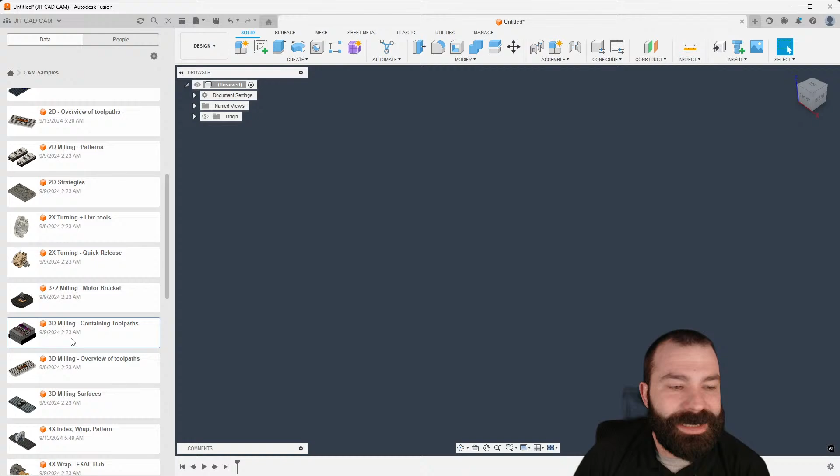So I think a lot of people, I don't know if the theme has just been 3D toolpaths lately, but I've gotten a lot of questions about things like boundaries, when to do what, all inside of Fusion. So for this, right off the start, I'm going to show you guys, there is an amazing example here called 3D milling containing toolpaths inside the default library. Now, it's great to go through and review the different types that we have, right? So keep in mind, this is a little bit of an older file, and I'm going to have to save this. So I'm going to go ahead and throw this in a little better place. Where are we at? And we are in April now. Man, this year is flying by. How do you guys feel?

So as you can see, this has a lot of different examples inside the software. However, I like this model because it does show a lot of people the power of Fusion and what it will and will not recognize when it comes to toolpaths, right? So as you can see in our very first setup, they've actually auto-created a few toolpaths for you. Now, I always tell people the process at which you want to use Fusion is actually pretty easy. Start with the basics, and of course, only add to stuff at the top moving down. You never want to jump down to the bottom and start selecting stuff, right? And then move right as you can.

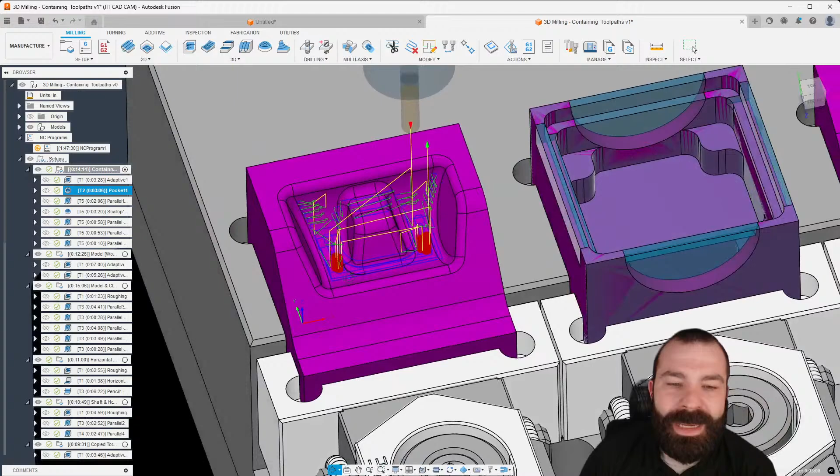So a good example of some containment boundary stuff is this is all being driven off a chain selection, which just so happens to be the edge up and around this profile. So again, at the simple level, we always like to say, get the blue lines where you want them, right? As you can see, that was a good example on how to get stuff down inside of that part to be able to rough it out. Now, I did get some other questions that were pretty interesting, and this is probably going to paint a lot of you a little better picture here. But in the event we now have the blue lines more or less where we want them, if we scroll down, and this is where I really like the idea of adding things after the fact, right?

One thing I think a lot of people don't realize is we can add machine surfaces, and we could either avoid them or stay away from them. We'll see this a little better on a 3D toolpath versus a 2D toolpath. Let's see what we got. We got a lovely scallop toolpath in here, so let's duplicate it to do this three different ways.

We have our original, and now I'm modifying a second version. We're going to say we want to avoid just these handful of surfaces, as you can see I'm going through and selecting those surfaces, and we're going to see what kind of toolpath we can get. Just like that, by doing an avoid surface, it's automatically removing where that toolpath is going to go.

One big thing about that at the end of the day is the fact that we have now scaled that toolpath down to not touch the surface. But something like contact point boundary is still working with the fact that the edge of the tool needs to get all the way down this fillet.

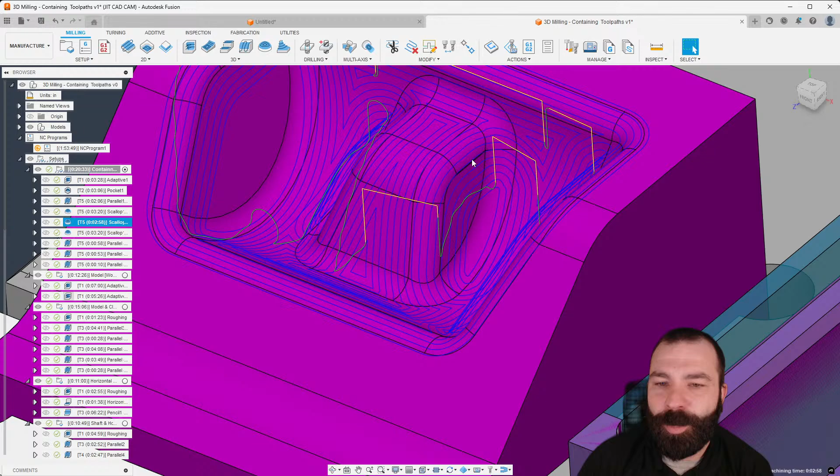Now another way to look at this, and this is the way I like to think, is if I go in and add machine surfaces, and let's say I want to stay away from these two walls a certain distance, I'm going to plug in 20 radial. What you're going to see when it comes to machining those areas, we will actually keep the tool further away from that wall. A good comparison of this is I highlight both these toolpaths.

It may be tricky for some of you to see, but the avoid surface touching, or only machine certain surfaces - I personally don't believe by default you should just go in and pick a bunch of surfaces and say machine specifically this. We like to narrow down the boundary first and foremost, and then from narrowing down that boundary, you can go in and in very specific areas say only do this, only do that.

Another thing I think a few people miss here is if you're somebody that's actually going to do stock to leave. So I'm going to go over to stock to leave here real quick, and let's just throw on 10. Then we're going to go back and look at the geometry.

Now if you look at model here down on the bottom right - is my head in the way? Let me get out of the way. Model on the bottom right is showing you there's already radial stock to leave 10. Remember, we've added that in, and from that we've added either an additional group to stay away from.

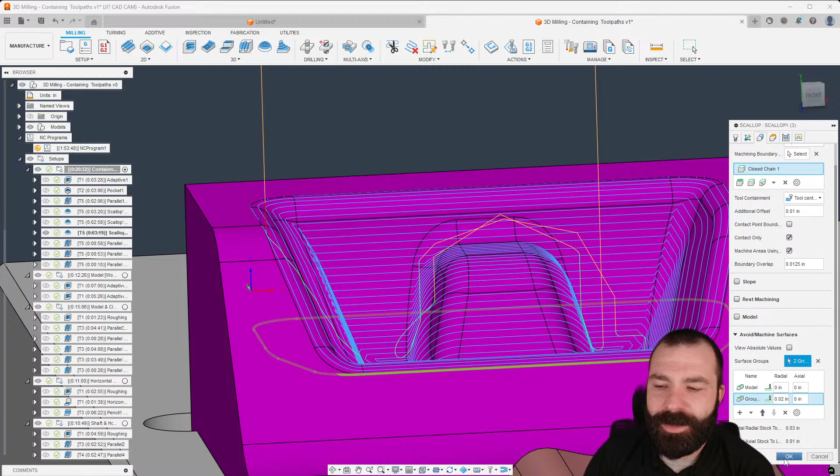So this is really valuable if you wanted - you don't need stock to leave anymore. We could actually use model, or we could use group as well, to be able to achieve additional stock to leave in a lot of different areas.

So again, if we turn those two toolpaths on, what you'll still see is we have 10 difference between these two toolpaths. But over here on that wall, we're actually achieving almost 30 - that's the 10 plus the additional 20 that we specified. So as you guys can see, when you get into that containment, it really is much better to start at the top and work your way down.

So if you're somebody that's doing mold making, again, perfect example here. Let's say I'm actually going to turn stock to leave off here, and what we're going to do is say our surface group is going to be based off a different set of surfaces. I would like to stay away from my internal fillets by an extra amount, so I'm going to utilize surface selection, and we're going to stay away from them by 20 in both directions.

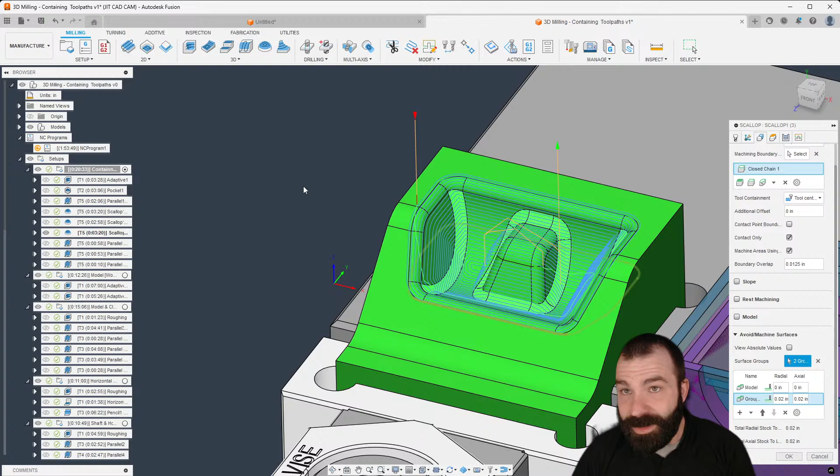Or if you have a larger radius tool that's getting down in those corners, again, causing those surface defects. Adding the surfaces is very valuable after the fact of getting the toolpath to where we want it on this part.

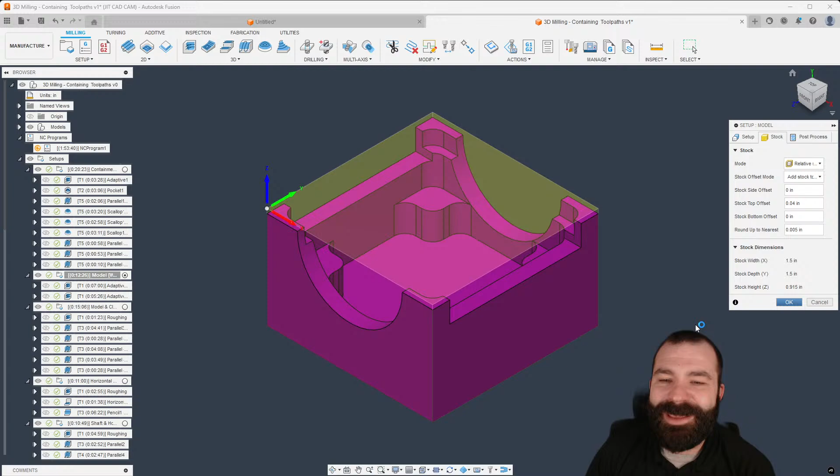So again, another really good and powerful one that a lot of people miss out on is when we talk about having stock already in place on this part. But if it was a casting, here's where your initial roughing is looking at the entire part profile, and then going back a second time we may use a different toolpath. But if we're using a casting, we have two models, one model could be the stock itself.

So if I go in and say, from solid stock, I'm going to not select everything, of course. What I'm looking for is actually just the model. If you guys give me a second here, this is probably the best part, is where I got to dig down and try to figure out where that stock model is. I did not draw this part. So as you can see, we now have our stock as basically a different profile, a different working model.

And if I regenerate my toolpaths with rest machining, you're going to notice it only machines the difference between those two models, my stock model and my part model. So Travis, let me know if you've ever thought about that with the models and how well that can help you.

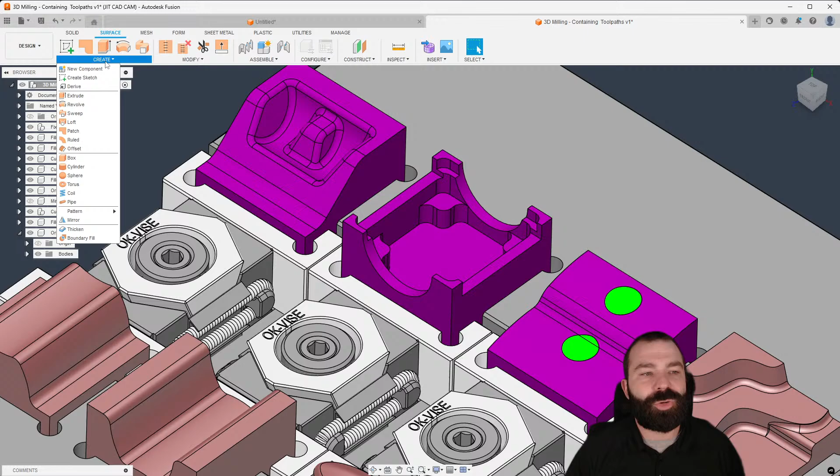I do know a traditional way, like Travis is talking, that if you wanted to stay away from something possibly, you could always go back to a surface and create an offset surface. And then you could offset that surface to be able to use and drive for a machining surface. So as you can see, we've now created a skin.

So if I go back to manufacture, if I tell the software this is an additional model for machining, I'm just going to use that skin. And then what we're going to see, you should see no toolpaths going anywhere near that surface. So again, now it's thinking based on the Z height and the X and Y that it can't get close to that surface placed there inside the part.

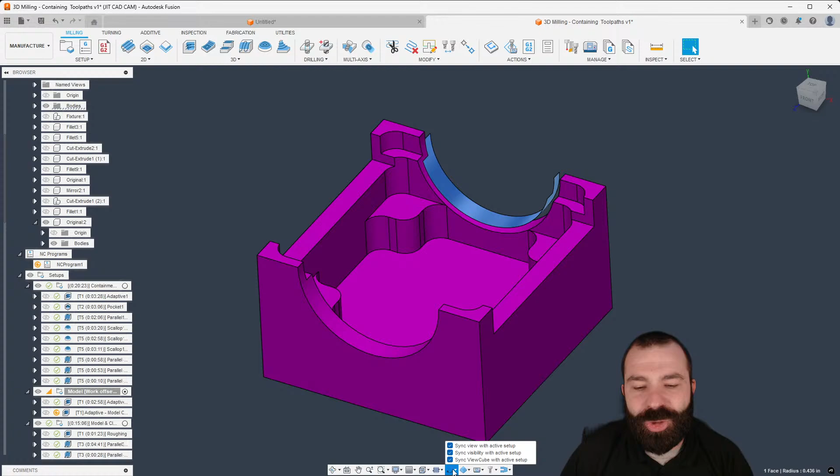So again, as you guys can see, working through more and more. Now, something I noticed a lot of you haven't done yet, and I highly recommend, is turning on your synchronizations down here. The reason why I like my synchronizations personally turned on is when I'm jumping from setup to setup. What you guys will notice is it's toggling on and off all of my bodies that are associated with that. Now, this gets better of course when you start to think about jigs and fixtures, especially in a multi-axis environment.

So here's my fixture now, I'm going to add that in with everything else. And now you can see the fixture even will turn on and turn off when jumping from part or setup to setup. So again, if you're going to run something in a pallet, it's very important to define those things, but it's also extremely important when we start to look at some of these other parts.

So again, down here, here's another good example of using model in addition to. So by default, we're roughing out this part. Now some of you are probably noticing we're not going down inside these holes. And the reason why we're not going down inside those holes at all is because in the geometry tab, somebody has added in the patches for manufacturing.

And again, those patches are hanging out over here on the left. So there's one patch, there's two patch. Now, why they're selecting three bodies, I don't know, which we should probably question that.

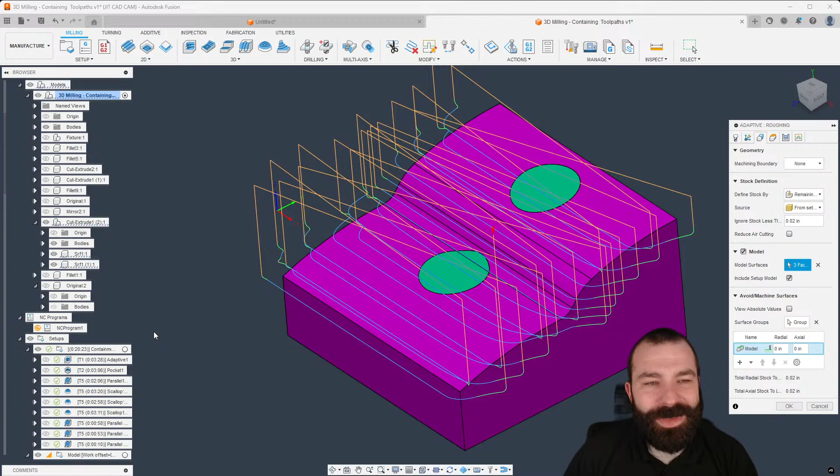As you can see, using patches to patch over your hole works really well. Now I've always been asked, do I patch something? Do I not patch something? What's the better workflow? I don't really think there is, right?

So when doing a 3D toolpath, you can notice we're dipping down inside those areas. Now they're doing a 3D toolpath specifically where the patch is, and that's based off the ability to select the model specifically without the original setup model. In my opinion, they're defining a certain area without needing the original setup model. This is not a very good way to work inside the software because that could have been its own setup.

Why are we machining a surface by itself? Doesn't quite make sense, but from an example standpoint, if I was to check include setup model right off the rip, as you guys can see, we're machining that whole surface, right? Now another way you could have done that is inside of the software.

Let's go ahead and shift gears here and grab a few more toolpaths. So as you can see here, we're machining everywhere but where the patches are. This is one of those things that depends on what you're doing and your end goal in the software. If we had model turned on and those two surfaces, but I wanted to contain this toolpath differently, selection would be your best friend.

Now how you could see that is, if I roll back up here, we're dipping into these holes, right? I go to a selection boundary, and I could say stay between those boundaries. So you guys are seeing I quickly select those couple of things. I hit OK, and now we're avoiding those holes again.

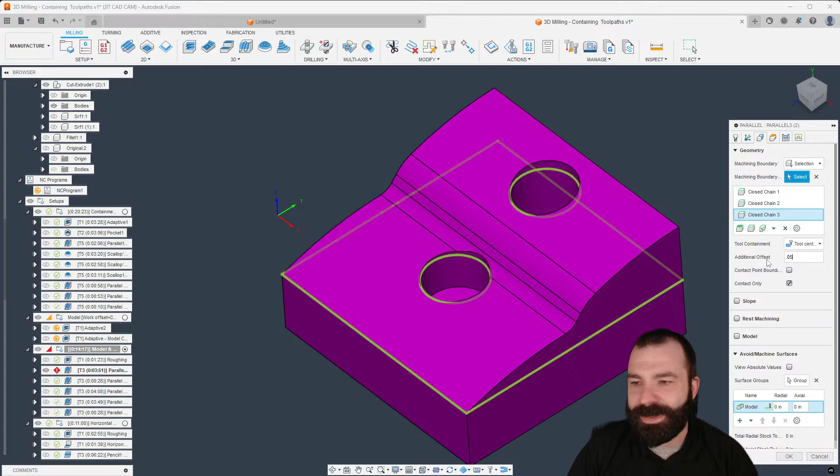Let's say I add an additional - I don't know the size of my tool, but let's say we go an additional .05 offset. For blending purposes, we may not want that edge to start rolling over, but we're dipping down inside of that area.

This is where I really believe the concept of starting from the top and adding to it as you go works really well. So as if I had surface patch models here, I can pull those surface patch models real quick, and now you'll see we are extending over that surface. With that extension, we're not actually dropping down inside the hole and causing any issues. A great way to change up your workflow and start to work with these boundaries.

Oh man, it's been a rough week. How about you guys out there? Flew to Connecticut a week ago, flew back to Pittsburgh earlier this week.

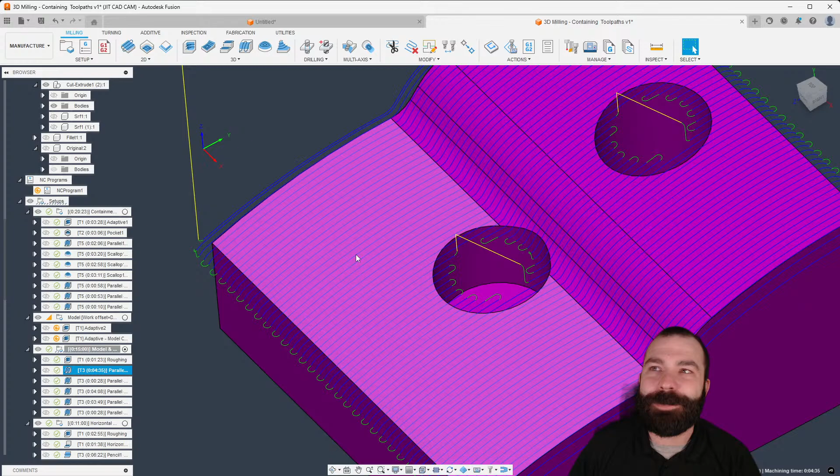Still trying to recover. So again, your boundaries, as you work down that list, become more and more valuable, right? Let's say, for example, I don't have model here at all.

Now I could go in, as you guys have seen, and say avoid these walls here. Now a lot of people don't realize we're still dipping inside of there, even with avoid set up. This is why I cannot stress the idea of adding in addition to, because when we're dipping in there, the tool has yet to make contact on that surface. So that contact point boundary is just being trimmed back to where it never touches the wall on that avoid.

So you guys can take it for what it's worth. We could do a lot more here. Moving a little further on, as some of you may guess, we want to extend those surfaces out. This is like Travis pointed out earlier, if I came back to my model, I'm going to throw this in the right area so we can pick it quickly.

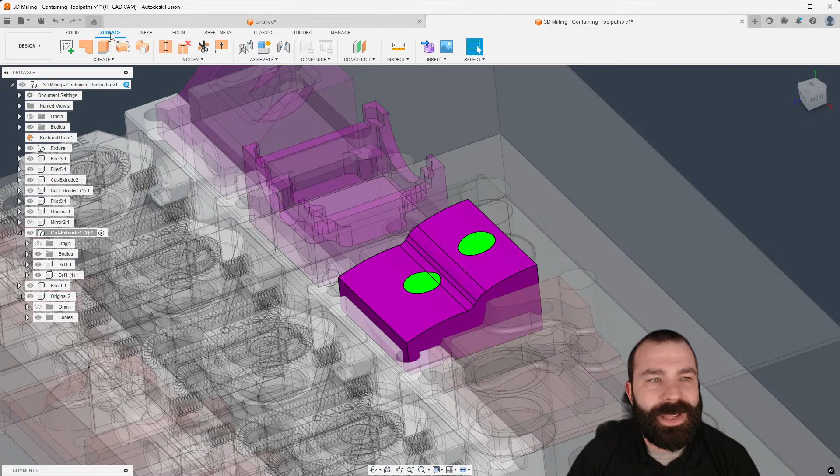I could go through and actually do a surface offset. Now I'm going to offset that entire top surface, leaving it at 0, and then I may do something like an extend. So I could go through and extend all edges of this and create a bigger plane to work on. With that plane to work on, that will be added as a machining boundary.

And it seems a little slow in chat this week. Are you guys running machines? Is that what's going on?

So again, as you guys are seeing, we're waterfalling past the edge of our part. We may not want that. We could add that model in addition to. And now I have that model to my advantage. Remember, I've already added boundaries up above. So maybe we say silhouette here. And as you can see, we're now going all the way to the edge of that surface. That surface is considered part of the model, and we're waterfalling past the edge of the part.

Running 2 machines. Travis, what you got, smart machines, right? Both of them?

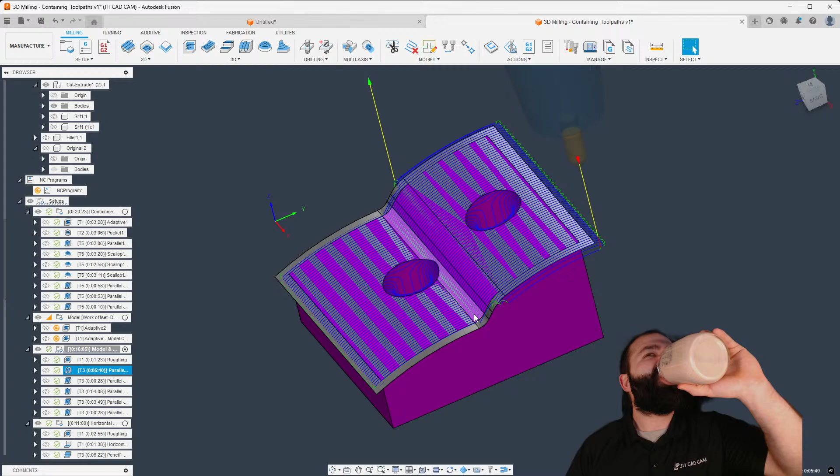So again, we could fix that based on selection. I'm gonna go ahead and say selection boundary. Now, here's one that I think a lot of people miss. The new boundary selection tool, in my opinion, the more I use it, the more I love it, right? So what I'm going to do is I'm actually going to use face contour this time, which allows me to pick multiple faces in one shot and auto project that boundary for manufacturing. So again, let's go ahead and drop off our extension here. We don't need that. And as you can see, now we're extending straight out using surfaces.

So as you guys can see, again, just going through these tool paths more and more, things like your selected boundaries, adding in additional models. As you notice, I never actually get down here to the bottom where I need to add surfaces. So it's kind of a last and final resort, right? So again, I could add these patches in, and now we're going to machine that entire area. We are waterfalling, and that is partially because of your selection process.

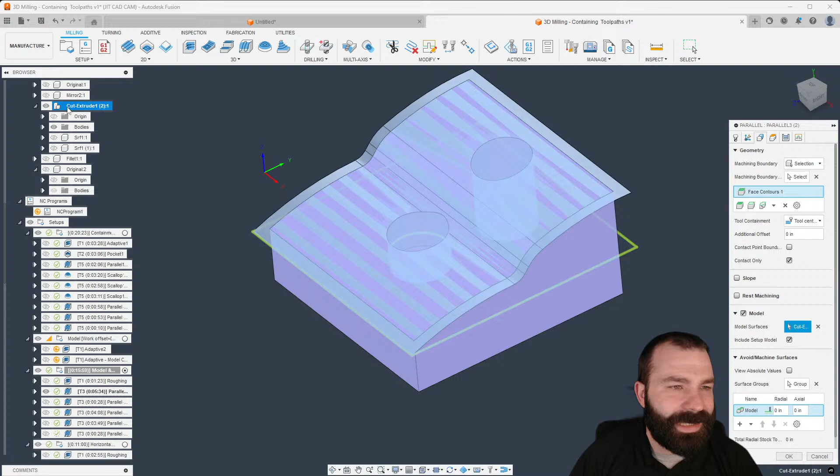Let's go back. We're going to add into that model. Where was it here? We did stick everything all into one extrude cut. So back again, because I'm getting click happy apparently. And we need that surface that we created and our 2 patches. Now, this leads me up to a really, really good point where, as some of you guys may or may not know, the ability to use things that involve components over bodies. And I'll show you an example.

Username, it always cracks me up. I'm going to call you user May out there, right? Us Ren May: cutting some plastic parts and they are nested. Is there a way to rough with horizontal and contour path? Do you want to rough with horizontal? Is there a chance you could send me a screenshot real quick and I could take a look?

So, good example here again is we're looking at this part. Something that has happened here is, one, that surface is lingering out there underneath the top level component. This is a big no-no, as a lot of you that have ever been trained by me know. But as you can see, this surface and this body lay underneath the top level component. And then you have 2 additional components all in one file.

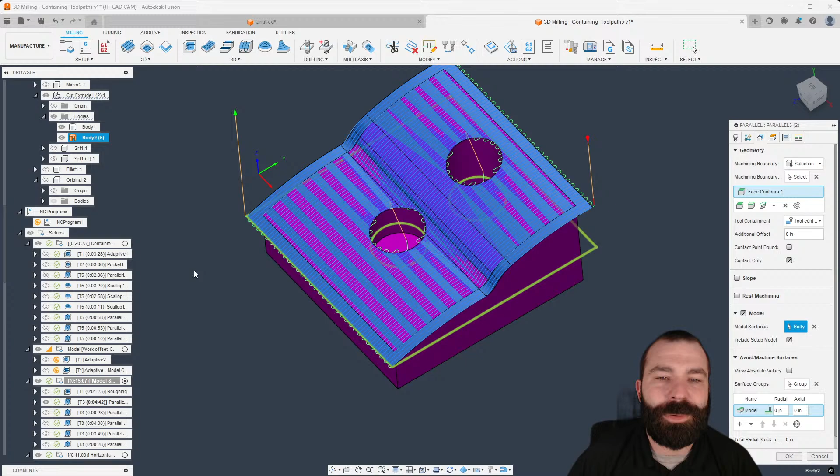So any size example would be great. So looks like we are looking for a simple thread mill calculation. M18 by 1 thread. So it looks like entering the crest. Okay.

Can I program a KUKA robot in Fusion? So in some robots, Gabriel, you actually can at the end of the day. Most robots use what's called a tool point. For a lot of you, that's called 68.2. Now, you're not going to have the freedom necessarily to control the joints of the robot from Fusion. And there are a couple of really good plugins that allow you to put Fusion code in there and then utilize that to manipulate it.

So it's been a while since I've had to look at that. I do have a lot of customers, Gabriel, that prefer PowerMill Robot. It's a much better solution for your use case. And you're more than welcome to shoot me an email at the info email address down below, and we can dive into that more.

All right. So Elijah's question is about the crest. And I remember this from last week and getting it to fit perfect. So when you're dealing with something that involves, in my opinion, and everybody does it different, his thread profile. Let's just say, for example, we're dealing with a 60-degree thread. I'm going to go ahead and set that to 60. And then what is happening in the world of Fusion, because we cannot, from a tool library standpoint, create a thread mill. I'm going to show this to you here. Give me a sec. So we have our thread mill tool.

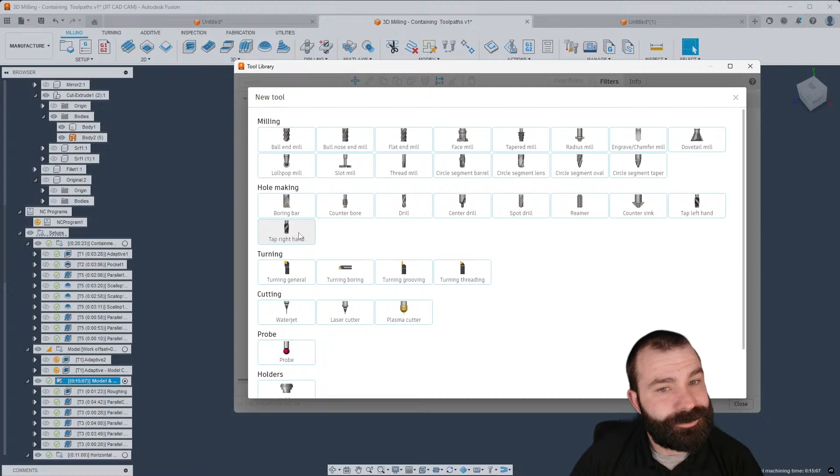Thread mill, thread mill, thread mill. Apps. Did I not see it? There we go. So the cutter inside of Fusion, the biggest problem is that at the very tip of the tool, it's always going to be a square profile, right? So as you can see, no matter what I define here, there is no profile, as in, is the tip of the profile round, right?

So something I like to do, and this might just be me, you guys can tell me, of course, is I like to draw what I'm going for, right? So if I know the tip radius in this case is, let's say, 10 thou. We got a tiny little circle way down in here, but I can actually do that math automatically now. So as I've set this up, I can be prepared to calculate whatever it is that I need.

Now, what I'm going to do is I'm going to add a horizontal line in here for reference, and then we're going to go ahead and coincidence this. But from whatever the diameter of my tool is, I can now do the math, get the dimension that I need, right? So again, what I'm really looking for is the distance from here to point times 2 to compensate depending on your threading system.

Travis, you hate the way you got to do NPT threads, huh? Is it the same scenario as you guys are seeing here? Again, what I like to do, this might just be me. There are a lot of good calculations out there. But as you can see, I can now control everything if I back way out and get this shrunk down.

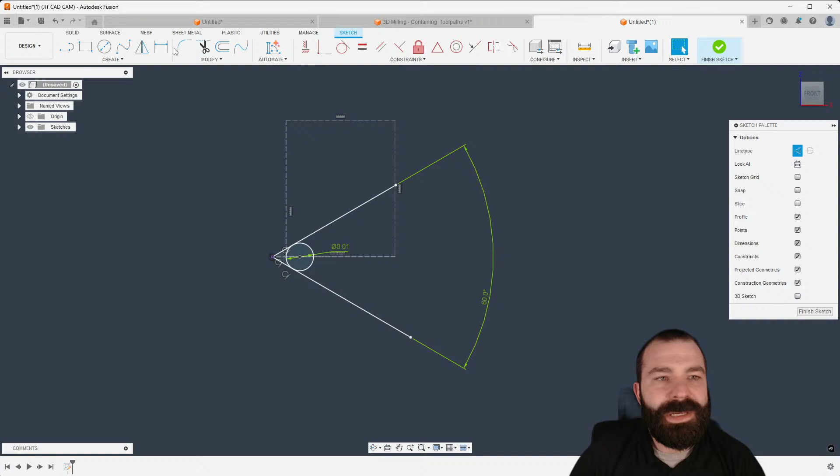Now that we have that, I can do the calculation to determine from the diameter of the tool or the radius of the tool. Again, if you guys didn't know, you can change stuff to center line instead. So if I went ahead and said diameter is whatever, let's say it's 125. And then from there, what is the distance from here to here? That would give me that additional offset, right?

Awesome to see Tim out there. Tim, you made it. Great to see you.

So again, you have your tool diameter, right? And then in this case, we're going to have an additional 5 thou times 2 diameter-wise offset, right? So depending on how you plan to do everything inside of Fusion, if we open that profile up by blank amount, that will fix our thread milling situation, right? So again, we do have a lovely little part here that's going to work for this.

So if I do my 2D thread, again, picking my inside profile, as you guys may or may not know, you have your thread pitch, of course, and then you have your pitch diameter offset. And this is where we would have to plug that in, right? Major diameter, minor diameter, and then add an additional 10 thou or whatever that dimension was that you calculated there. So this would get you very, very close.

To start with, I do recommend to most people, no matter what you do in thread milling, it always seems that the first time you cut threads, it's never the correct fit anyways. So always shoot for the low side if you're internal or the high side if you're external.

All right, Bogdan, you sent a file to support. Create a finishing toolpath like the one in the third setup. All right, but need to start in the middle of the part, step over outwards. So give me a sec here real quick. Let's get that pulled up. Jump over to my other side.

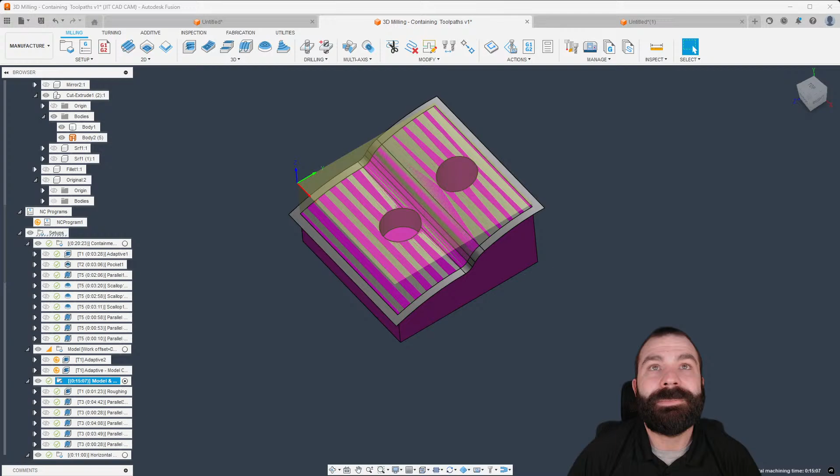If any of you guys are asking questions in chat, give me a moment. I'm going to jump back over. I see Travis recognized Tim from Facebook. Or not Facebook, but LinkedIn. Oh, YouTube. There we go. There we go. Let's get that uploaded.

And there we go. Get a good old-fashioned OBS pulled back up so I can see you guys.

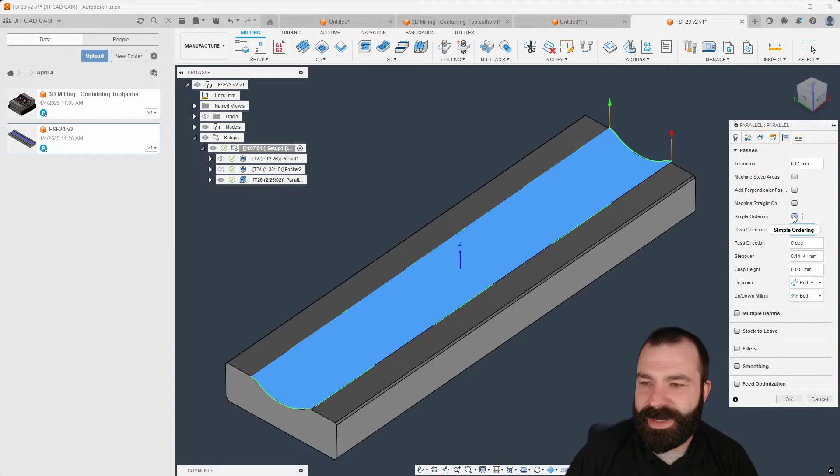Now, may get lucky on a profile like this because there is the option to say up milling versus down milling, or we could say only up milling. Now, I don't know how well this is going to start in the middle and work outwards. Again, it did not. So this might be one of those things that I might have to do a little magic on my end. Let's get back to both here and actually get this set up so that we can work in one direction. Now, simple ordering sometimes will help as well.

But as you can see, it's not doing much here, right? So again, we want to start at the lowest point and assume that we're going to work our way outwards as we work up those profiles, right? Sorry about that. So there we go. Again, we have a parallel toolpath. There are some other options as well that might work. Blend could be an option that would work. Again, I would base this off the different toolpaths that we have, of course. So we could go into blend. I'm not seeing anything that's saying inside to outside.

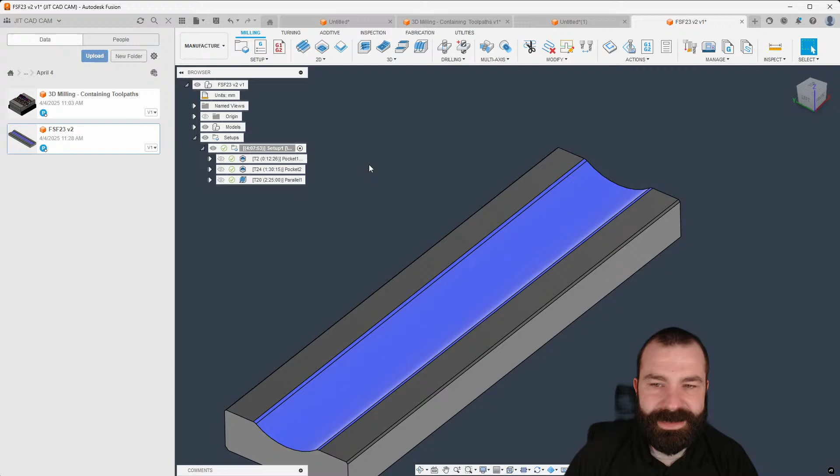But if we take a look at picking those profiles, again, we have our drive surfaces here. Go ahead and exit that. Did you apply appearances to this? Looks like you do. Okay, cool. So let's go in. Again, we're going to go ahead and switch out to a blend strategy. I'm going to add in my drive surfaces. Also going to add in my drive curves, which I feel like I always put the wrong way. Let's go ahead and see what we get real quick this way.

You guys going crazy in chat. Give me a minute to get caught up here once I get this path on the part. So Elijah, hold on here. Let's get back up to the top. Woo. Man, you guys are going quick in chat. All right.

FeatureCAM was a really, really good product, and it still is a really good product, Elijah. So it's one of the products we recommend for anybody doing things with dual turret type mill turn work or requiring mill turn simulation. It's an outstanding product because of all the features that are still in it. It's also feature recognition.

Forgot that Bogdan sent this in. Bogdan, you and your non-bald eagle units here. Let's go ahead and get that changed out. And let's get our tolerance turned up. There we go. See if we can't get a little faster toolpath out of this. So again, depending on where you're creating those profiles to start and finish, but like I said, this toolpath in particular doesn't have an inside out kind of setting. So this would lead me to believe that maybe something like steep and shallow would work really well for this specific use case.

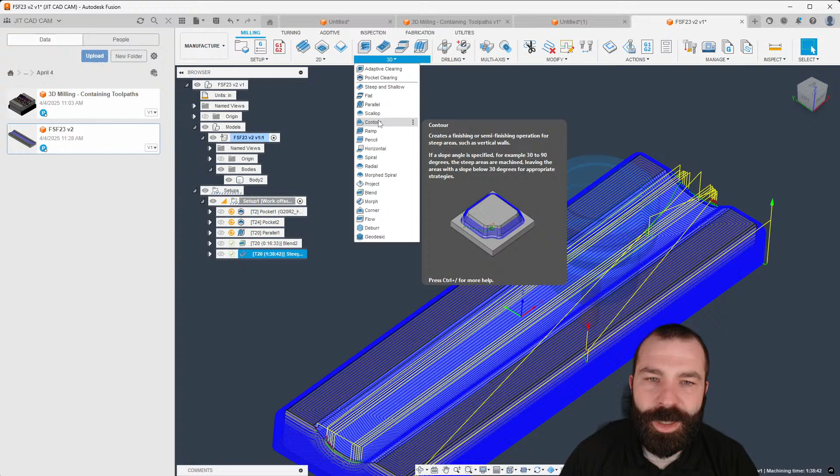Again, in steep and shallow, if we say do a parallel pass, we are climb directioning. However, the inside out option as scallop would have disappearing, right? So dependent on the toolpath and what you're going for, you might be best in a 3D contour situation. And that 3D contour situation allows you to create shallow areas and then work upwards or downwards, right? As you're seeing here, we are working towards the center of the part. We could reverse our direction and say up milling versus down milling. Give me 1 sec here. We're going to order bottom up. And now you're seeing a bottom up workflow. I'm going to run through this here real quick.

So again, Elijah, I would say back in the day, the idea was feature-driven CAM, extremely powerful, right? We kind of see that in Fusion right now when you start to do things like hole rec, because what it's looking at is the features of the holes themselves. Now, in the world of FeatureCAM, it's looking at all features on the part and extracting that data and creating those tasks automatically. Yep. FeatureCAM does have machine sim for mill turn. It is a great asset.

Get dual path lathe. So are you talking, Tim, like dual channel? As in you want to do multitasking, lower turret, upper turret, simultaneous type stuff, pinch turning, one on main, one on sub type things?

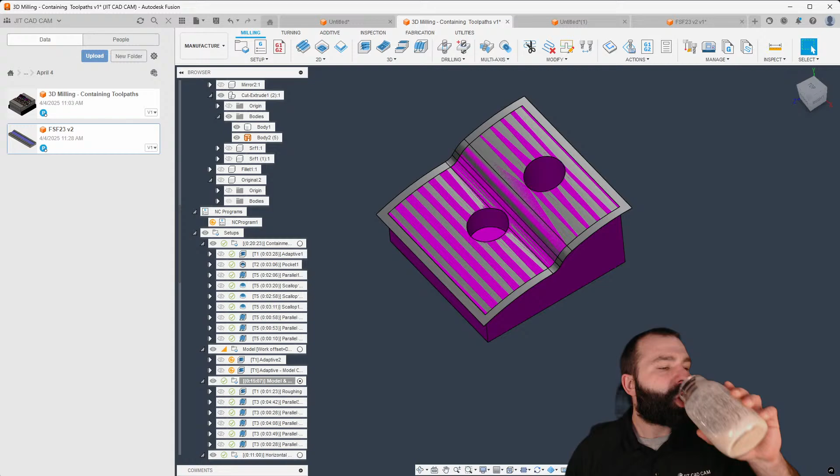Give you a second here to answer in chat.

Yep. So, Tim, that's the big thing about FeatureCAM, right? It is built for that. I mean, I think it can handle four channels plus. So if you have 2 uppers, 2 lowers, a main, and a sub, it'll do it all in one. Now, there's a lot of confusion, though, because FeatureCAM comes with Part Maker.

For anybody that's actually curious about FeatureCAM, you can actually drop your Fusion Machining Extension because it's included in that package as well. Part Maker is one of the best softwares out for doing things on a Swiss machine. So that's kind of where the line starts to get drawn, is when you make that jump from mill turn to Swiss, Part Maker is the way to go. But because you get all 3 products rolled into one, Fusion, FeatureCAM, and Part Maker, it's kind of a complete solution, right?

So let me know, does that kind of start to point you in the right direction, Bogdan? Now, I know based on the profile that you showed me here, of course, you're getting some different dilemmas because you're so shallow down at the inside of the part. Now, again, if I was to go back and just do a traditional scallop toolpath, we do have that ability to order inside out or outside in, and this is what I was looking for.

The bad news is because of the toolpath direction, we can't do both up and down milling as well as both directions. It's still going to come across that surface. So it's not necessarily going to run the full length of the part. Now, if you wanted it to really be forced where we have to manipulate the surface, I would jump back into Fusion, right? So Fusion's design workspace.

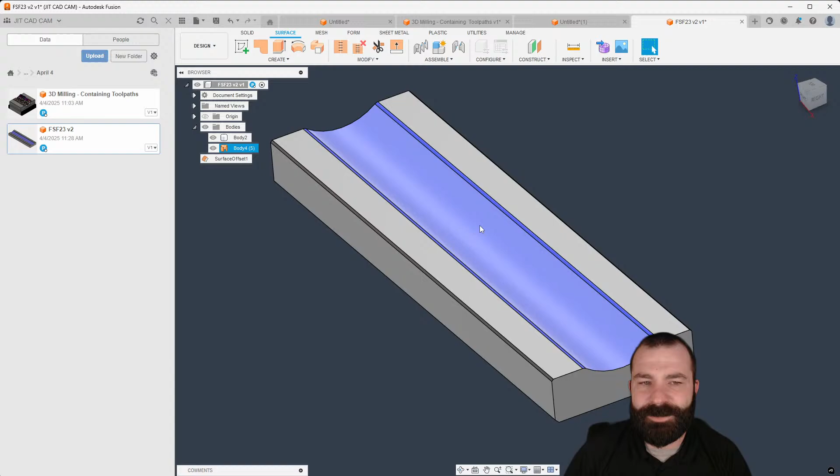Now I'm going to utilize a mid plane here. So I could say, make me a plane between these two surfaces. And then from that, I could do a split body as well. So we could go ahead and say split body. And what we're going to split is that surface using the splitting tool.

Now, some of you may be curious why I'm doing it this way. And well, the idea is I'm never harming my original part. This is the luxury of creating copies or duplicates and things like that, right? So again, I now have utilized those surfaces. So depending on how you're going to define and set things up, also big no-no here, guys. I should have turned on my timeline. This is 100% on me here.

So I have that ability to now use the edges of those surfaces or use those specific surfaces for machining, right? So again, we have our parallel path here. If I actually wanted to say, you know what, model, do I want to include it? Do I not want to include it, right? So I could say model specifically on this one half. Go ahead and get those two faces selected. And then what I could say is leave this as a silhouette, I believe, still.

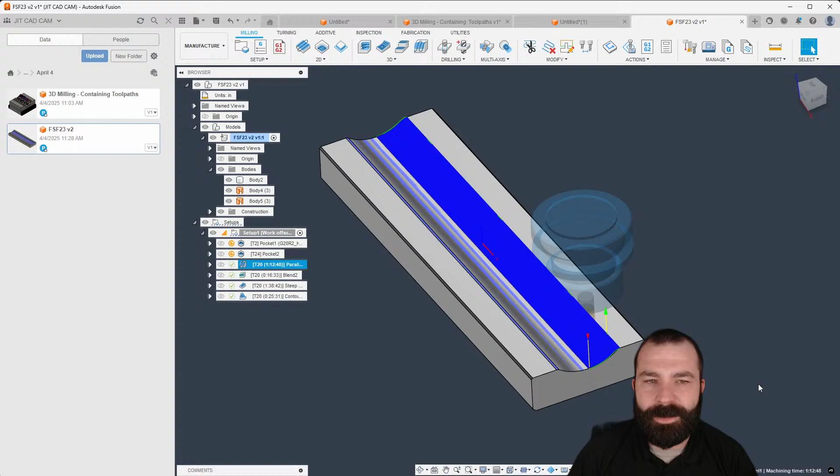And now you can see I'm machining bottom up. And then it's rinse and repeat, right? So again, if I take that toolpath and duplicate it, we're going to go ahead and do the same thing all over again, except I'm going to pick the two surfaces back the other way. And with that, you're going to see we're now going top to bottom, so I could change direction.

So we have a pass direction here. We'll go ahead and pick that upper edge, which signifies where to start. So let's go ahead and change that out to the other side.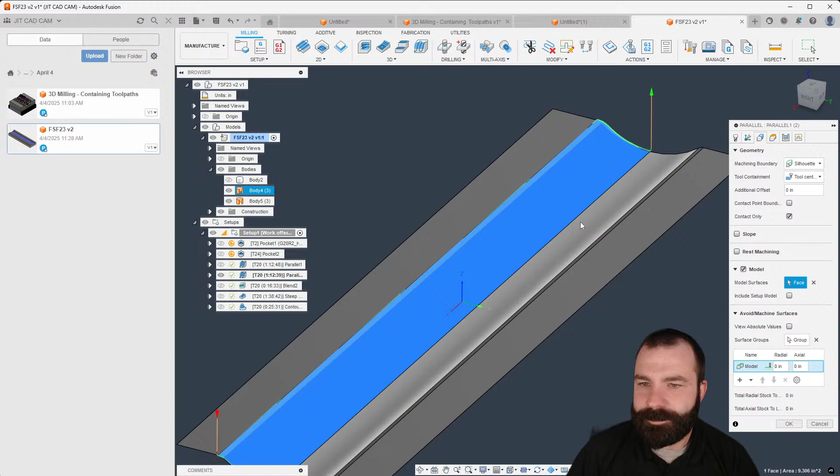Maybe the selection surface order is what it's going after. So let's go ahead and change our selection order. We have both selected here. Go ahead and add those. And we're still going the wrong direction.

No, you're 100% correct, Bogdan. As Bogdan's recommended, it's a whole other solution as well. That would require us to extend it the other way. That would work quite well with the scallop toolpath, of course. So what he's recommending, again, I'm going to butcher this file a little bit more here, is if we go back to surface, as you guys saw me use before, the extend tool.

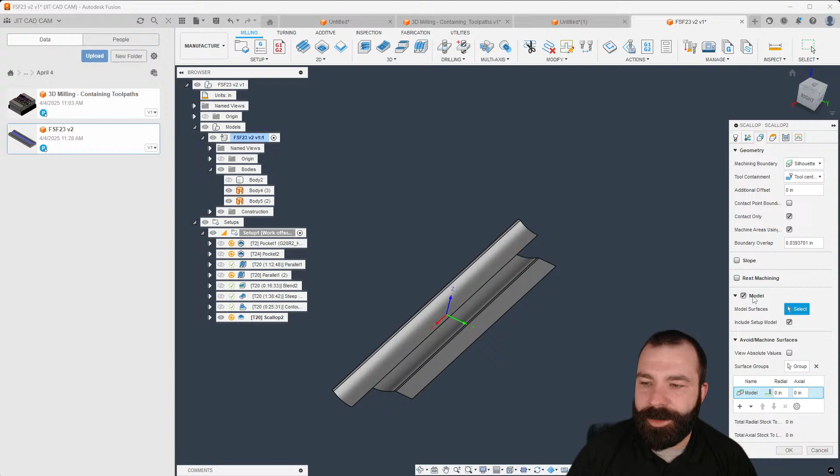If I extend these couple of surfaces out further, again, I can do that at both ends. And then with that, that is the surface for manufacturing. Now, I'm just going to delete this one extra surface. But when we're manufacturing, instead of using that parallel toolpath, he was talking about using scallop. And we'll just grab a brand new scallop toolpath. Again, if we say model, we could include the original or not include the original.

And then based on that model selection, if I use silhouette, it's automatically recognizing that that is the total profile I want, right? So again, I only did one half here, but as you guys can see, I'm driving this from, this is the part that always makes me laugh. I never actually used avoid machine surface here, right? I actually told the software I only want to machine those models. And with that, I want a silhouette of the models.

Now, keep in mind, if I turned on include setup model here, it's going to basically machine everything, including our original part, as you can see here, right? So again, by turning that off and driving it based on the surfaces, it's actually a better workflow to go through and pick those model surfaces, whether or not you created an offset, right?

So again, if I went in and I said, you know what, I want to machine only this surface here in the middle. Again, those offset surfaces are not on, but just like that, I could drive any toolpath from a surface without using avoid machine surface, if that makes sense.

Just emailed some screenshots over. All right, guys, give me a sec here. I see a lot of you jumping up in chat. Guys, if you have questions at any time, feel free to go ahead and let me know. All right, did you send it to the ticket email? Because I am not seeing it anywhere. Emailed over some screenshots of the part. All right, we'll give that a minute here.

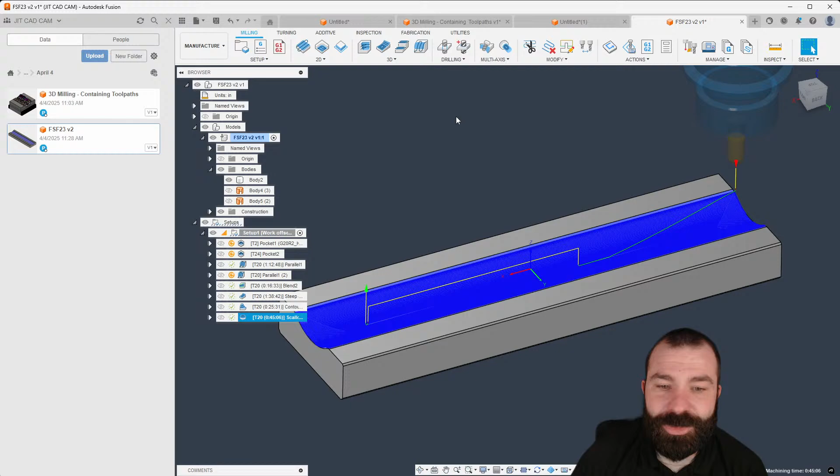So Bogdan, again, as you're seeing, you're 100% correct. Splitting that surface would work. You could have also created sketches. Again, this is the luxury. I don't know why we got on the subject this week. It's been hilarious to talk about, in my opinion. But like, again, instead of splitting surfaces, as you guys have seen me do here, let's go ahead and throw everything away in this file and turn on our timeline like a good person would.

So now that I have my timeline, if I was to create a sketch on the bottom here, we could go through and we could set, you know, a line midpoint to midpoint. Or if you're like me and you like rectangles, we could go ahead and create our rectangle. Again, this is going to be our machining boundary each direction so that we could define that toolpath inside out, right? So again, going into manufacture, we look at that parallel toolpath.

And in this case, Bogdan, I'm going to go ahead and just create a brand new toolpath. So again, we could use parallel, if I could find it. Instead of silhouette, we could say selection. There's our boundary, and we could work with that, right? So again, one of you can figure it out. My brain is not working. We should be able to change direction. Say 180. I think that's how you do it. It is exactly how you do it. Can't be an expert 24/7. I just got to figure it out like you guys.

Oh, you sent it to the info email? All right, no problem. I'll go grab that real quick. So let's get over there. All right. Info email. Okay.

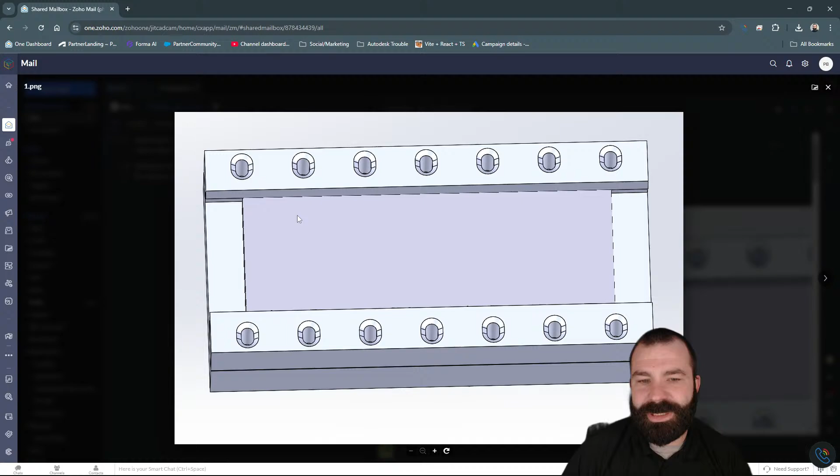Actually, that'll work. Let me pull this over here fast. All right, so as you guys can see, what he's actually got is he's pinching on a sheet of metal here, and then he's running a duplicate of parts. That's what's going to be happening. So in my opinion, this is not nesting.

All right, Bogdan. Bogdan Big Spender. Awesome, great to see it in chat.

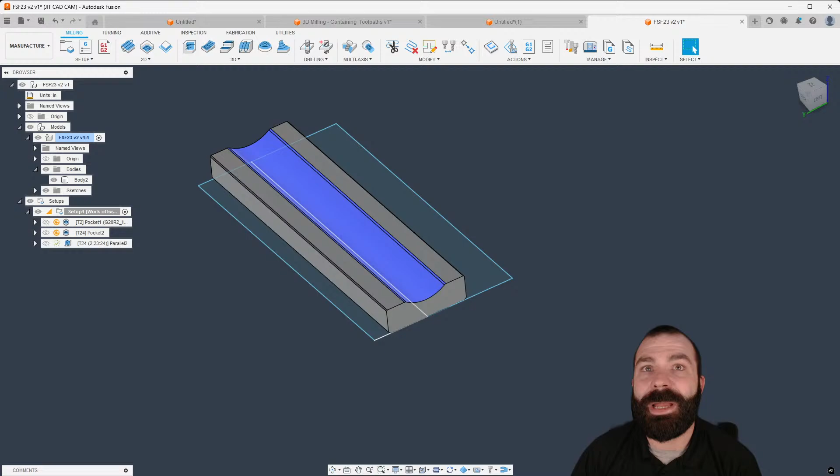So when doing stuff like that, if I remember correctly, the question is how to either contain those or how to machine each one individually. So what I'm going to do here real fast is go ahead and do the smart thing and create a component. And then with that, let's go ahead and draw our profile.

I'm just going to use a couple of real fast rectangles, and get that sketch back. Okay, so let's just say that's the part I'm trying to make, right? Now I'm going to have the part, and then what I like to do is create a pattern of the component based on an axis, right? So let's say we're going to run 3 of these.

Now, in my opinion, I could select each one as the model for manufacturing. You could set up your stock pretty normal. That's not going to be a problem at the end of the day because, again, remember we did the smart thing and used components. So let's go grab all those components - component 1, 2, and 3. And then we could set our stock size pretty normal, right?

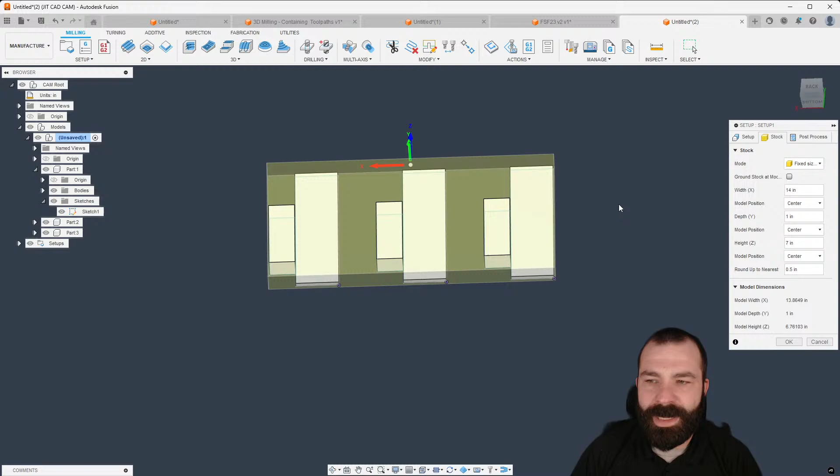You had to oversize it for some reason. Again, you have that full range of ability to set it to whatever you need, as long as you do the right thing, which is set your Z-axis up, of course, your X-axis in the right direction, and then go back and fix your mistakes as you're seeing yours truly have to do here. Give me a quick second here. Pull from the top. We're still not big enough. These are some pretty big parts. Who designed these things? And there we go.

So now we have our parts. We have them in our material. So when it comes time to machine these, this is again where we talk about a couple of different options.

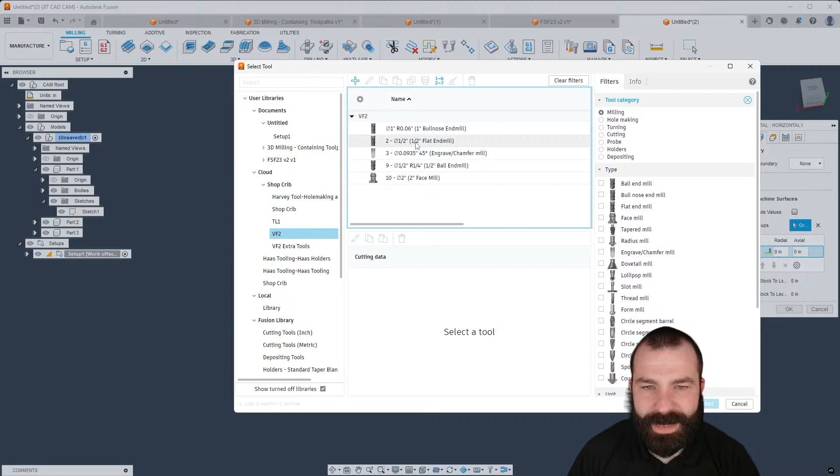Watch out. So as you can see, what I'm going to do is my machining - if I wanted to use 3D toolpaths, by all means, guys, you could, right? So if I went in and said something like horizontal all of these parts, now, again, machining boundary-wise, we could say none, or leave it as a silhouette. It's going to come down to what you're using for toolpaths, right? Obviously not a ball end mill - let's get that half inch flat because these are some bigger parts. And now what you're seeing is it going through and horizontally toolpathing the top of each one of these.

However, if I was making something like this and I was to throw 3D adaptive clearing at it, what you're going to notice is it's going to machine everything. Now, again, I've shown this to a lot of people - there's a lot of ways to do this, right? I'm going to reorder that we get a true toolpath in the proper stock.

Let's say, because of the way these parts are being held, I don't want to machine away all the material in between. So I have a couple of options in getting into that mindset of boundaries. If I jump back to design and sketch my boundary, you can exaggerate this boundary because the idea is the boundary is bigger than the stock, but Fusion only cares about the area between that boundary and the stock.

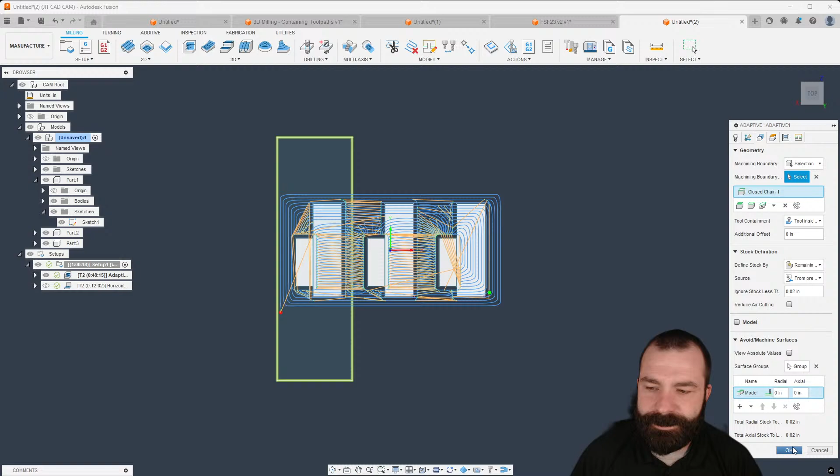When I jump back to manufacture, I redo that actual toolpath, selecting the boundary again. I would like the tool to stay inside the boundary. What you'll notice is that toolpath will only stay where that stock material is from our setup. So again, that's just one option.

Depending on your workflow, keep in mind, when doing the same part in a linear pattern, we don't actually have to go through and program each one. If I wanted to repeat this down to the other two, I could do a new pattern. Again, this is the value of components. If I say component pattern and pick the first one, it will go through and find the targets automatically.

For targets, we could go ahead and grab them manually if we wanted. I'm going to hit OK, then drag my toolpath down in there. I will need to reorder this, of course. Let's get that dragged back up and regenerate that toolpath. Give it a second to think.

As you're seeing now, based on component pattern, anything I do to one—I'm going to show you guys here, we'll grab that boundary again—is automatically being patterned to the other ones. So I don't need to program each individual part, especially if we're running them out of a stick like this.

Now there's an additional advantage to this when I jump over to design. I go ahead and bring that boundary in, maybe I want to do something with tabs. There's multiple ways to do tabs, and I'm a firm believer of modeling tabs.

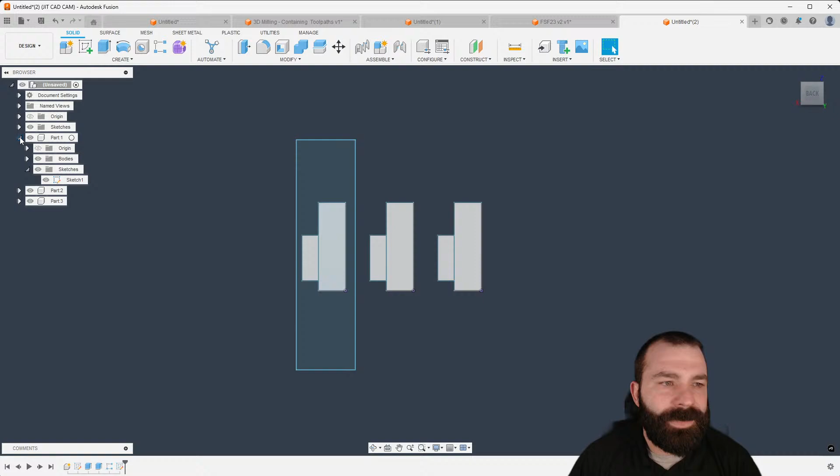So this is where we may say a new component. It would be wise, if you're doing this, to roll back your timeline, back when you were possibly designing your part, and make a set of tabs as its own component. Again, this is going to be tabs, and I could go through and create whatever tab I want. Let's say I'm going to put one here and just put one here.

Again, we can extrude those two out. I'm going to make them the same thickness as my part just to make my life easy. As you can see, we now have the part, we have the tabs themselves, we have our total assembly. And if I roll my timeline back forward down here, I can go back to that original component pattern, add my tabs to the pattern, and just like that, you've now duplicated out everything going on here.

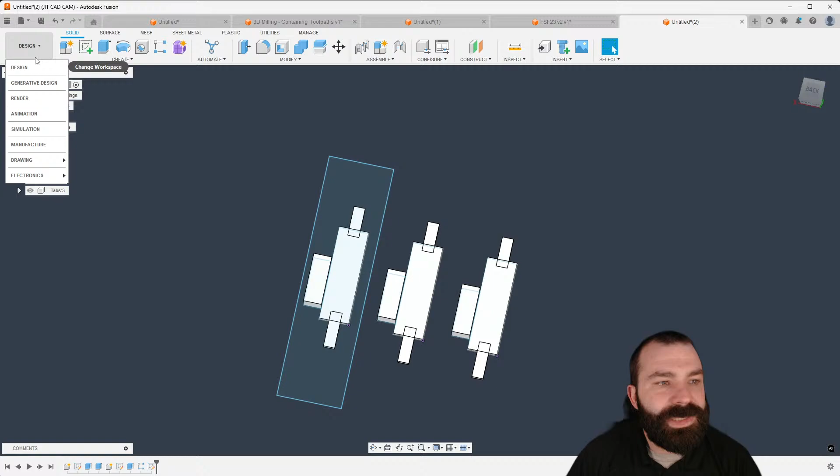So we've kind of been in this whole idea of boundaries all day today, as well as adding model back and forth. Again, I go back to design—here's my original toolpaths. Keep in mind, those tabs are not a part of my original model to be manufactured. My final goal is to make those parts, part 1, 2, and 3.

As you can see by activating that, because I have my synchronizations on down here, we've automatically turned off the tabs. For roughing, I would like to add the tabs in, and I will add the tabs in via model. So if I go to my tabs now, we are recognizing that there is material at the end of my part which we are auto avoiding. Big thing here, as you can see, is utilizing the tabs as well as a boundary to successfully get my toolpaths where I want them.

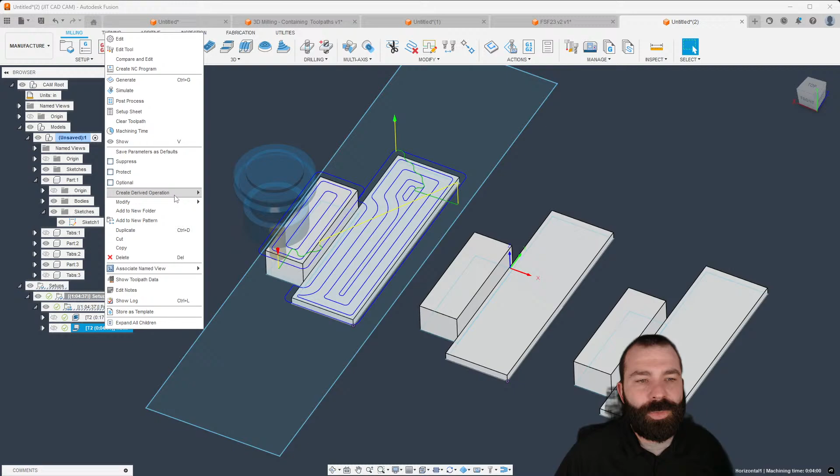On my horizontal toolpath, I may not care about those tabs—I don't need to machine the top of the tab. But if we go in and say something like 3D contour, I'm just going to derive this operation. This is a way to cheat, just so you know—tool outside of boundary, there we go. Now we have our 3D contour, but notice I would be cutting my tab.

So again, I'll jump back. We'll go ahead and add our tabs in using model. And as you're noticing, now we're avoiding that tab.

But we're going all the way around the tab, right? So this is where you get to pick your poison, guys, going back to my design side. We could bring that boundary in, and going back to manufacture, regenerate everything we have. Those tabs extend outside my stock, same as my boundary. My boundary is no longer outside. As you can see, we're machining all the way down, around, and back up.

So Bogdan, let's go ahead and see what you got. You sent the file one more time. Bogdan, what are you, so you're trying to split that surface still?

Go ahead and get that pulled up on my other screen here. Oh, let's get back in there. And pull that in one more time. Close out those two tickets real quick. Bogdan, give me a sec while I have this up. And let's get that uploaded.

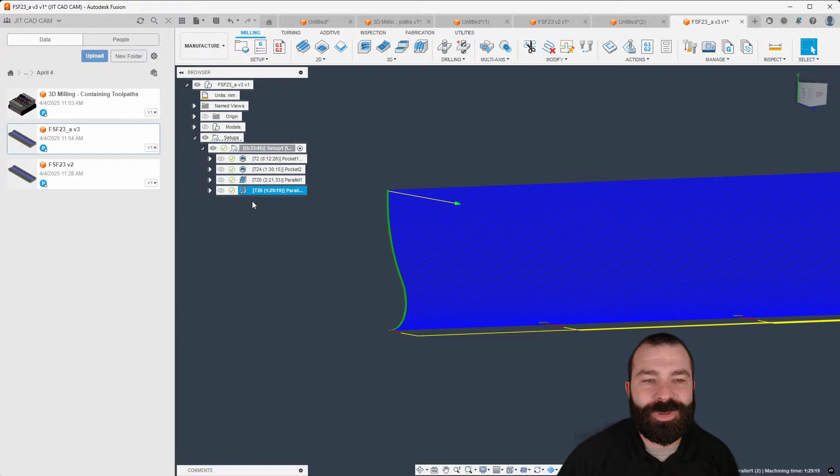But the good news is we've got the blue lines on the part, but when we look at trying to constrain this down, we're waterfalling outside of our boundary. Well, that's an XY containment. By XY, I mean, based on our work offset, we're looking in XY. So that would lead me to believe the geometry tab is where the problem is. Now, if you notice, his boundary here is so much bigger than what he's trying to machine, but yet because he told it the model without the original, he's getting limited, right?

So again, he picked the two faces, get the model turned back on and flipped over for you guys. As you can see there, so he picked two faces. I'm assuming he did like I did, right? So again, he has a body here. Nope, he just picked the surfaces on the part. Or am I missing the bodies here somewhere?

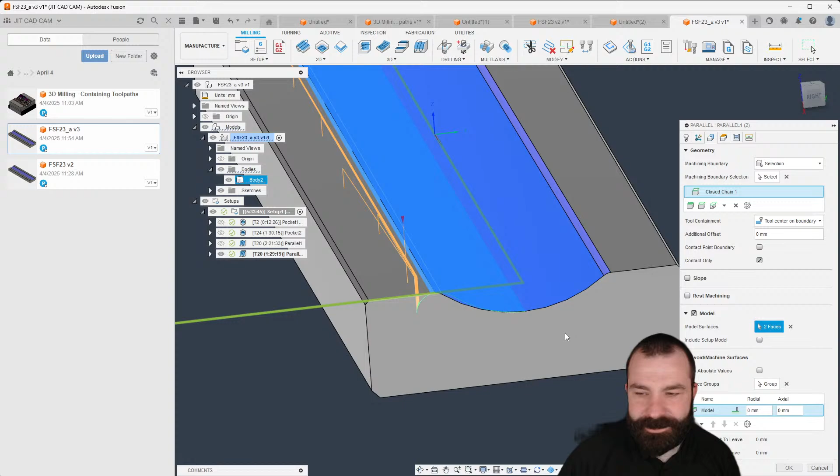Let's see here. Give it a quick sec. Where did you... Oh, I see what you did. Okay, so you pulled like this surface, right? So the problem that he's having is that containment boundary runs all the way out here. And because he's saying only these two surfaces without the top surface, that is what's causing the waterfall effect.

So to show you guys this, if I add a third surface, this one here, leaving the top empty, what you're going to notice is we're now double waterfalling on this part, right? So as you can see, if we reset the process here, I need to redefine how I'm setting my boundary, right? Notice how this boundary extends way past everything going on.

Go back to design here real quick. If I pull this guy in, now you can see that rectangle is only that specific area, right? So I think there is some taper on. But this would be one of the few times I would tell you guys a rectangle might not be the best of choices. Let's go ahead and delete this one edge. We're going to pull that out a little further. And I'm going to drop a line end to end here because of the taper. All I've done is created a new boundary to work with, right?

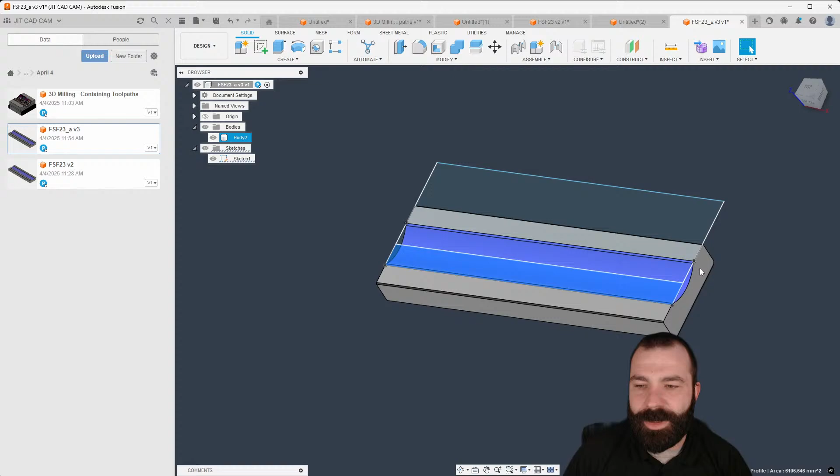Back to manufacture, back to editing my toolpath. Go ahead and say yes. I'm going to go ahead and pick that new chain. Again, I'm going to remove the two, right? So let's go ahead and grab those two surfaces again.

For some reason, we're grabbing everything. Try that one more time. Grab the first one, and then we'll come back for the second one. Sometimes it's a little easier to define. There we go. We don't want a face contour. We want that as part of the model for me.

But it doesn't want to give it to us because the sketch is getting in my way. That, boom. There we go. We got our two faces. We got our boundary set. Again, now we got that toolpath on one half. So this is where we go back and we say, okay, I want to switch it to 180 degrees from where it is to go bottom up. So again, Bogdan, I hope that helps you out. The problem was that big green boundary area that you had was getting in the way.

So Ken, I personally haven't used Hypermill. I've heard mixed reviews about it, like all softwares, right? I mean, it doesn't matter what software you use, people get a little upset. Again, from my experience, a lot of the guys that have Hypermill, they love it. I don't encounter a lot of people switching from Hypermill. Now, it's not anything to say that it's the best CAM software. I don't think any of them are the best software.

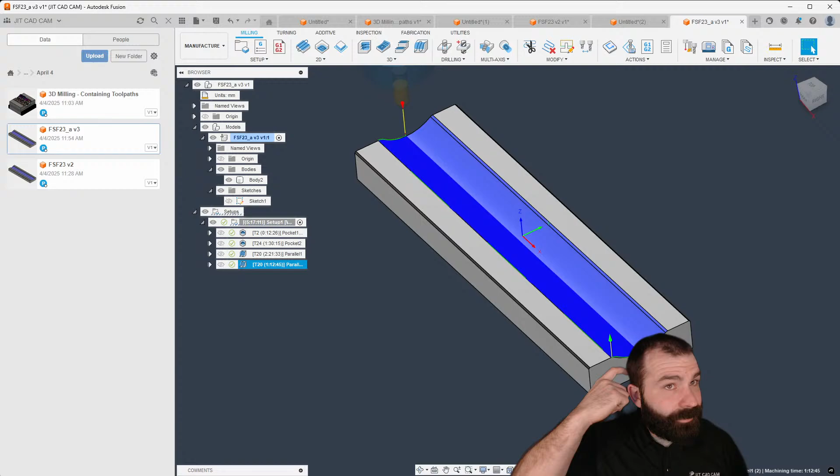Yeah, and I appreciate you coming in here, but I don't think anybody's going to know the cost of Hypermill. But I would highly recommend that you go ahead and send us an email at info and we see why you're so curious about Hypermill, because we would be happy to convince you of a different Autodesk product, probably more affordable off the start anyways.

Yeah, so again, you're 100% correct, Tim. Al did go to one of them. I don't know what it is off of the top of my head. I can pull it up on my other screen. He went with Toolpath, didn't he? Yeah, so he's with Toolpath Labs. Very similar. I mean, they both have their different approach. From my understanding, one of them was aiming more towards, again, guys, don't hassle me about this in chat. It's been a while since I've deeply looked at either one.

One was looking at, yeah, they do have Cam Assist. I think Toolpath is Cam Assist, isn't it? I don't know. You guys got me pulling them up on the other screen now. Yeah, Cloud NC is Cam Assist, right? And then Toolpath is, what is it? Oh man, I'm pulling it up here. Give me a sec. So yeah, so you have Toolpath, and then you have Cloud NC, and again, there's a lot of things people always ask me. Hear me out. Again, I see opinions. You guys are entitled to your opinion.

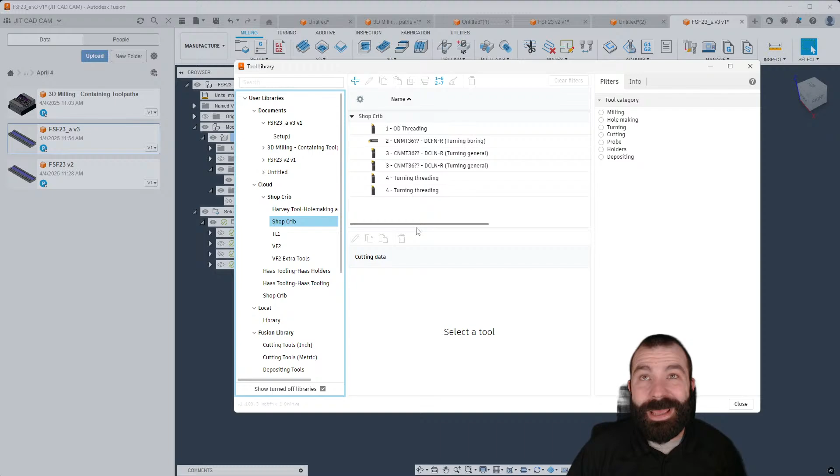Any good methods on Fusion libraries? I mean, that is a good conversation to have because I have been fighting Okuma and Mazaks lately. I always tell people right now, and I'm not giving you guys anything, but the way we build out tool libraries is probably going to change, right? So, in my opinion, I have a tendency to have a shop crib that basically would have everything. And then, as you can see, I've made a folder specifically shop crib. But from that, I tend to keep a couple of machines with tools on it.

Now, something kind of wild. I want to show this to you. I've been curious about this. It's going to be a good one. So let's go ahead and, do I have a simple machine I can throw something on? I have a lot of broken machines because you guys have me doing stuff during the week. So if this part was on a machine, I've been curious about this. And if we look at our tool library, oh, it's not there. I thought it would be. Maybe I'm thinking a different way. There's been times where that actual tool or machine shows up in my library. You guys seen that before?

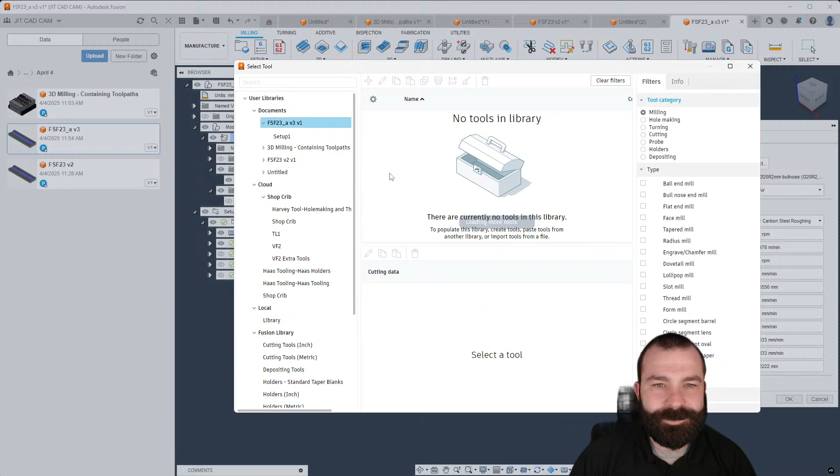I've seen it. It's been crazy where you go in and you're like, oh yeah, we're going to look at this part. And then all of a sudden you have a machine library or you have the machine in your library. Maybe I'm going crazy. Let me go look somewhere else. Definitely wouldn't be here. I'm going crazy. That's all there is to it. It was almost like you had the machine's library itself show up. Oh, let's look at this a little different way. Hold on. We're going to go select the tool. Nope, still didn't show up. I'm being a liar. Yep, I don't see it here. I feel like I've seen it before, though. You guys agree with me?

Oh, broken machine. I hear a lot of people talk shit about machines. I can tell you this: a machine that makes parts that are good, that makes paychecks, is a good machine.

So I do remember you mentioning something about a tool sticking out of your holder. Now, the great thing is a lot of things have changed in the world of Fusion over the years. Like if you're importing tools, which might be a good one to point out, it's imported and I can't fix it. So based on the information, your tool has a gauge length. And for some of you, that gauge length is from where that tool sits in the spindle all the way down to the tip of the tool, right? So this is actually something you could measure with a presetter, if that makes sense.

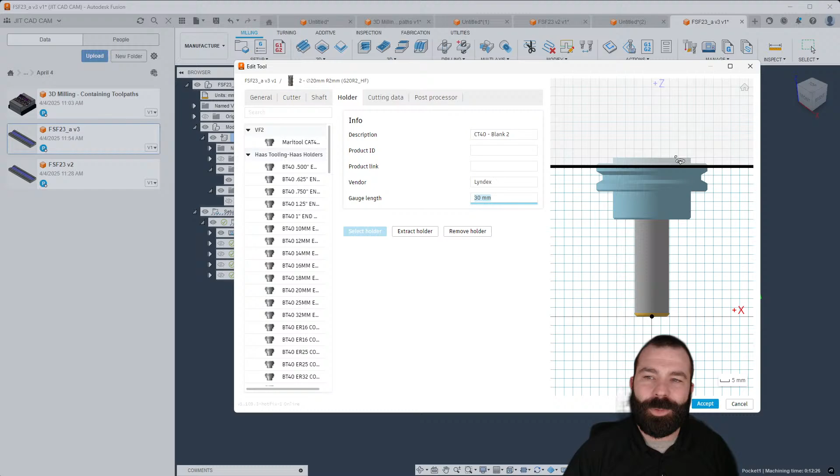But that length that you have, if that was to change, for example, to 30 in this case, notice how it moves that black line down. If you have a tool that's hanging out of your machine and your tool holder has a Cat 40 or whatever taper, I don't know if any of the default ones do. I think they've cleaned them all up. Let's see if I can find, yeah, I'm not going to be able to find one that has.

But if you have the Cat 40 or 50 or whatever holder you're using, your gauge length will change based on that information. And when you go to machine sim, it's really weird because your tool is hanging out and it looks like it's holding on to the pull stud at the tip of the spindle. But Travis, that's where I would point you to look at it.

Now, if your machine as a whole, in this case, is also broken, which I see pretty commonly, let me go ahead and get into the machine library. This is not the machine library for the... So if I was to go into my machine library in this case, and I was to edit in Machine Builder, I would need to verify and make sure that when I set up my machine, my tool, as you can see where that is selected, is in the actual machine, right? As you can see, that is where the tool is supposed to sit, and that is where that gauge line is at the machine and where your gauge length comes from.

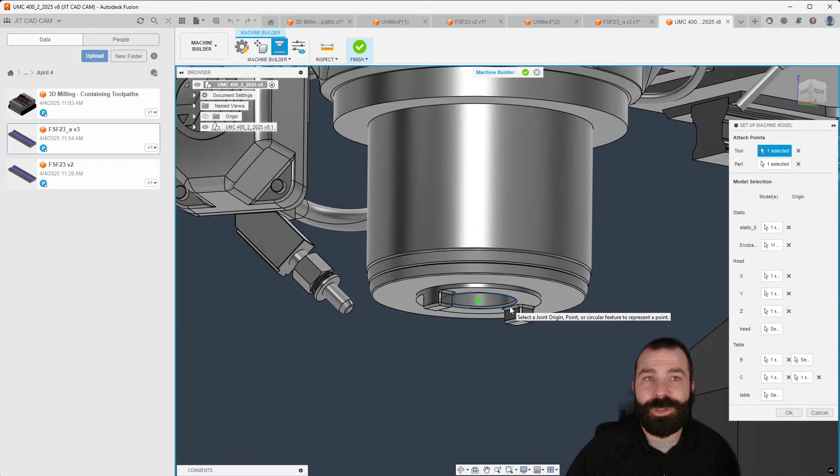Again, if you were to view your machine, you'll see here in a sec, I could actually say, let's say there was a 1/2-inch tool that is 5 inches long. Notice how the tool is in the spindle, right? Pretty big deal. But those would be the two places I would look if your tool is not setting right.

Travis, if you want to send me the tool, feel free and I'll take a look. I do know, trying to remember where I put the link. Give me a sec here. I think I'm going to do a video. Yes, I do. We'll have the link. So for those of you that don't know, this one I saw the other day. Get my OBS pulled back up.

There is a way to import 3D models into the tool library if you didn't know. You would have to install the Fusion Essentials add-on from GitHub, and then that allows you to pull in tools themselves in those tool holders, right? So you can now bring in a 3D model of a tool utilizing this information right here.

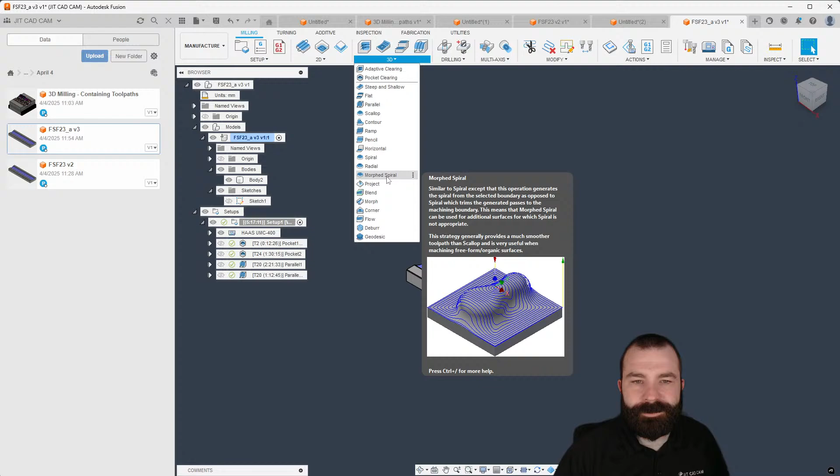So Bogdan is now using Morph instead on his part. So let's take a look. 3D Morph. Now in Morph, there is no inside to outside setting, right? So again, the problem with Morph is going to be based on the direction itself. Those of you that don't know, you could say Morph, and then I want to stay between edge and edge. And from that, let's go ahead and get a toolpath on here.

Our step over right now. We have a number of step overs. Yeah, we're going to use step over, maximum step over. So as you can see, we're running down and back across the part, very similar to how we did parallel. And with that, one, you have what's called closest, right? And what closest is going to do is it's basically going to try to maintain the profile that you're trying to machine.

So again, we don't have any real ability to set inside-outside, outside-inside as we would with scallop, right? One nice thing though, as I'm seeing here, is you do have what's called pass extension. Let's say I wanted to go 10 millimeters past. As you can see, we can extend in a direction with that actual setting. Actually, maybe I put it in the wrong. Take a look.

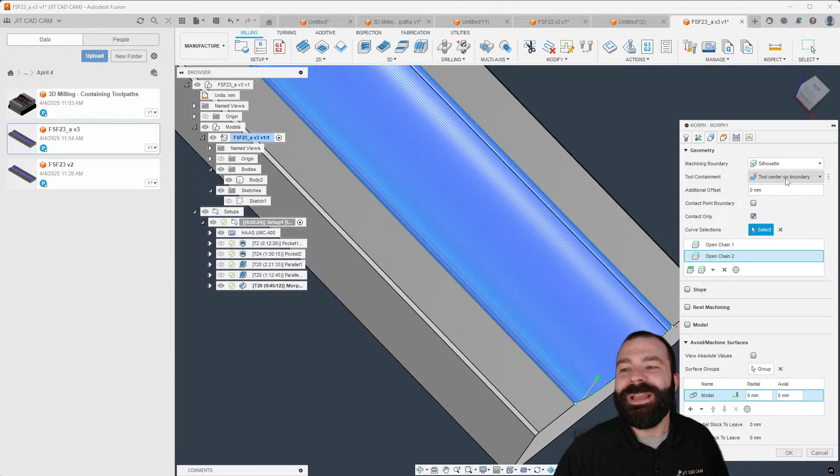I see some more questions jumping around in chat. Oh, that's right. We were supposed to cover wire EDM, weren't we, Jordan? I totally forgot about that.

All right. So Bogdan, it looks like morph isn't going to work the best because you're trying to set it from the middle out and there's only a few tool paths. My recommendation, Bogdan, is go ahead and check the tool paths. When you're looking at those tool paths, you could define whether they're going to work inside out or outside in on that passes tab. So that kind of wraps that up.

So EDM, let's talk a little bit about EDM. This will actually work pretty good. In the world of Fusion and EDM, I know a lot of people out there that have EDM and they've been doing stuff inside of Fusion. Now, what we do is we kind of trick the system. And I'm going to show you guys a couple of ways to do so.

So if you are somebody looking to cut a part out on an EDM, if I jump back to manufacture real quick, actually, we're going to go to design. The first thing I would recommend to most people is to go in and create a sketch of what you want to actually EDM and then export a DXF.

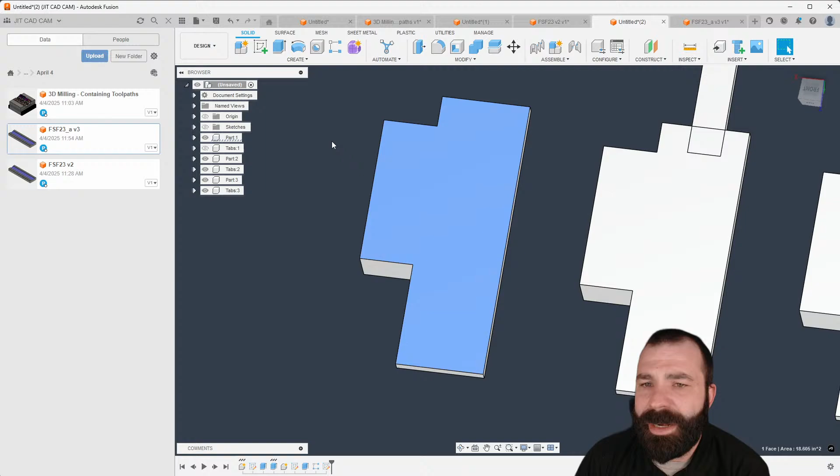So what I'm going to do here is get our tabs out of the way. Let's say I wanted to cut this bottom profile here. If I create a sketch on that face, you're going to see I now have that sketch over here on the left, and I can right click and export as DXF.

So just know your sketches that you've defined or your geometries you've defined, we could send this out as a DXF, and somebody with an EDM software could open that DXF up, and then a traditional workflow of EDM.

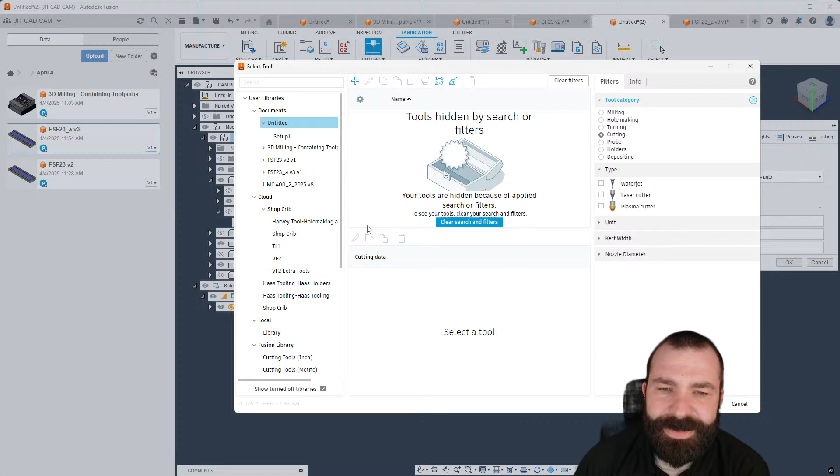Now, if we change that up, though, inside of Fusion, it's kind of a hack, but it works: instead of doing milling, we actually say we're doing cutting. We are going to lie to the software here, because what we could really do is define our path for cutting using a 2D profile from the fabrication tab and then defining something like a laser, plasma, or water jet. So as you can see, we have laser cutters, plasmas, and water jets. I'm going to go ahead and just grab a laser cutter.

Now, keep in mind, you do have a lot of things here like kerf width that you could set, or are you going to compensate that with your wire size at the machine? So if we go ahead and do a silhouette chain, grab my part here, that is now the profile around the outside of my part. Again, speeds and feeds are all dependent on your machine, especially when we talk about EDM: your kerf width, your wire size, your amps, your voltage, everything possible.

But what I am doing is creating that profile inside of Fusion to run around the outside, and then I could post this out using a lot of the post processors. Now, this will more than likely take a custom post, but what I'm going to do is grab, let's see here. I grabbed a laser, didn't I? Well, we're in the wrong library here. Let's get to the Fusion library. Something that would possibly work is using something like a plasma post. Again, there is a laser post and a water jet post inside of Fusion.

Most actual EDM machines are just looking for XY codes to create that toolpath profile. Some of these, going from a laser to an EDM, you may need to put material codes in. But really, most EDMs just want generic G code. It may be some simple M code changes to turn the EDM on and off, start, stop, things like that, maybe a little different title block. As you've seen, I've made a million videos on all of this, but meat and potatoes, it's usually just X, Y points in space.

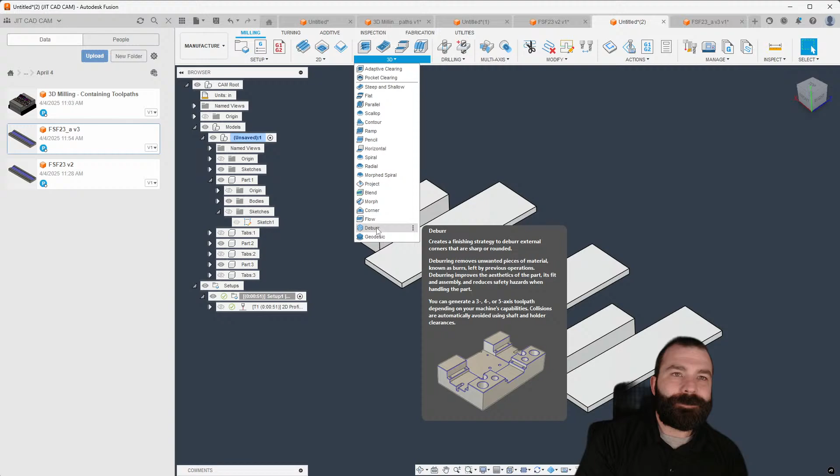I see Travis's message about undercutting deburrs. If you guys want to see an example of that, we could draw something here.

Here would be a good example of an intersecting hole that needs deburring underneath or undercutting. If I go into manufacture, a 3D deburr, again, I need to define a tool. Go ahead and grab a lollipop cutter here in library.

With that lollipop cutter, we're going to go ahead and tell the software that I want to go only where I'm selecting.

As you can see, the deburr toolpath has automatically picked up on the fact that it needs to go in deep enough, the heights, the angles, and everything automatically. This is why, Ken, we highly recommend the deburr toolpath.

We could, of course, give you a personalized demo on that if you don't have the machining extension, and we could evaluate your needs for it if it's just this toolpath.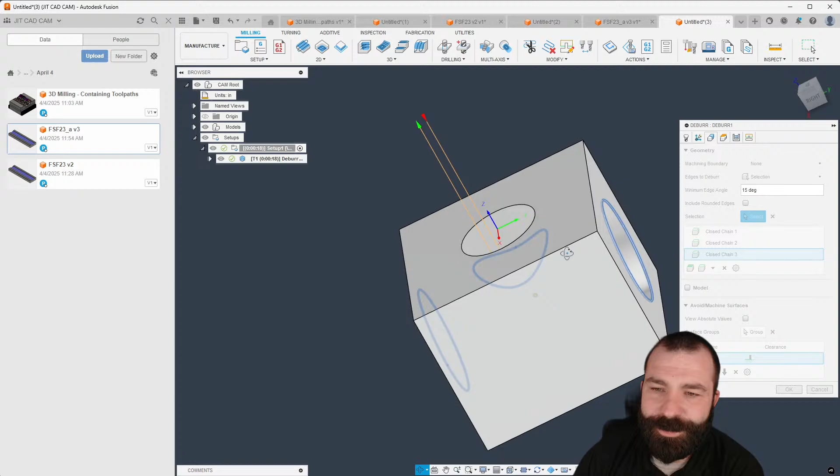In my opinion, this toolpath alone sells it, because at the same time, I could have done both the end pieces too, all from a 3-axis environment if my tool has the stick out in the reach, right?

As you could see, just in a 3-axis machine, I could be deburring quite a bit more than what most people would expect. If we were working on a 4-axis or a 5-axis machine, of course, it's even better, because then we would have multi-axis tilting to be able to really improve and change how that workflow is going to be.

Cool. Any other questions outside of that?

Somehow we've made it a whopping hour and a half without any internet problems. So things are going good here.

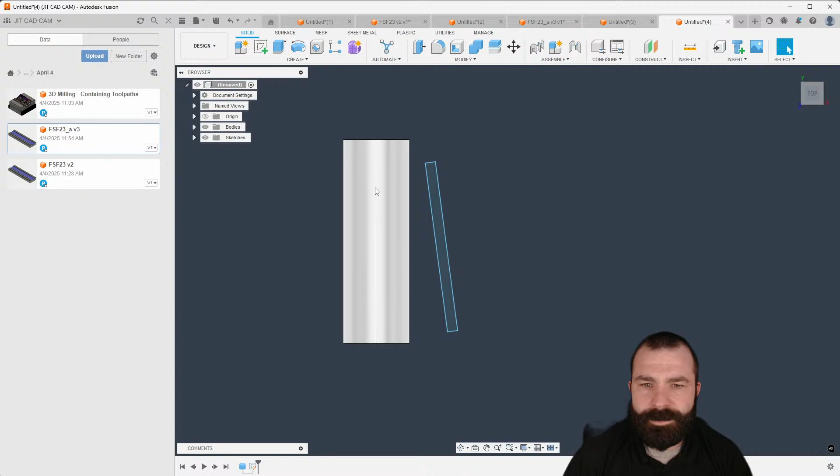So if I go ahead and create a new part here real quick, say it's a cylinder, and then if I create an area to machine, and I'm going to create my sketch, and let's just do a 3-point rectangle. You can emboss this. Oh, and we want to cut that.

So if I needed to machine something wrapping around a cylinder at the end of the day, regardless of how much it wraps or how little, if it's single point, or you're actually machining something that points to center. Now, I make this very known, because in the world of manufacturing, you do have the ability to do a wrapped toolpath, right?

So again, we're going to go ahead and define our Z up. Actually, let's go back. Z is this axis, X is this way, and let's rotate around center, right?

Now, if I go into 2D and I do 2D pocket, what you're going to see is in the multi-axis tab, I actually have what's called wrap. I need to wrap something around a cylinder, and then I need to define my pocket.

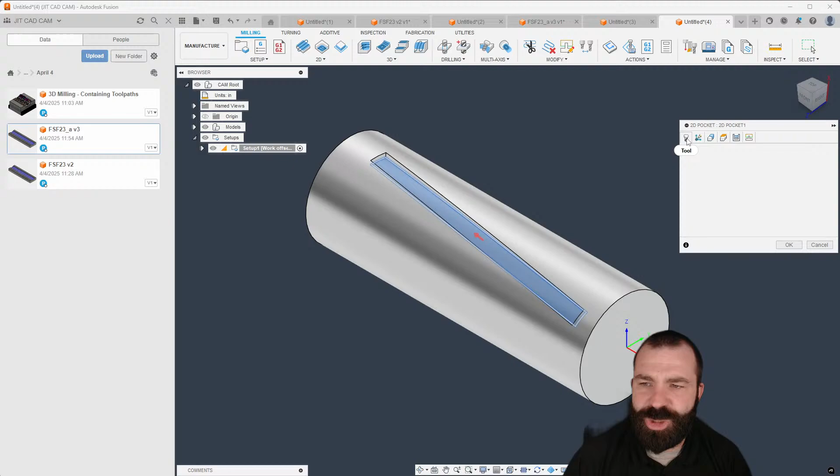So in this case, I'm going to go ahead and pick that chain. And then from that, we're going to go ahead and give this a tool, right? So again, we're going to go back through my library. If I don't have something in here that's like more of a smaller cutter, there we go.

And of course, that's not going to fit because that pocket is not big enough. So give me a quick second to get that changed up here. Pocket a little bit wider. And go back into manufacturing.

Now, keep in mind, with wrap toolpath, it always points the tool to center at the end of the day. So a lot of people miss that whole concept that if the tool is always pointed at center, and these walls aren't actually running down to the center point, right? So they're not like, here's your center of rotation, and they always point out from center, which would mean your pocket is tapered, right? These are square cut.

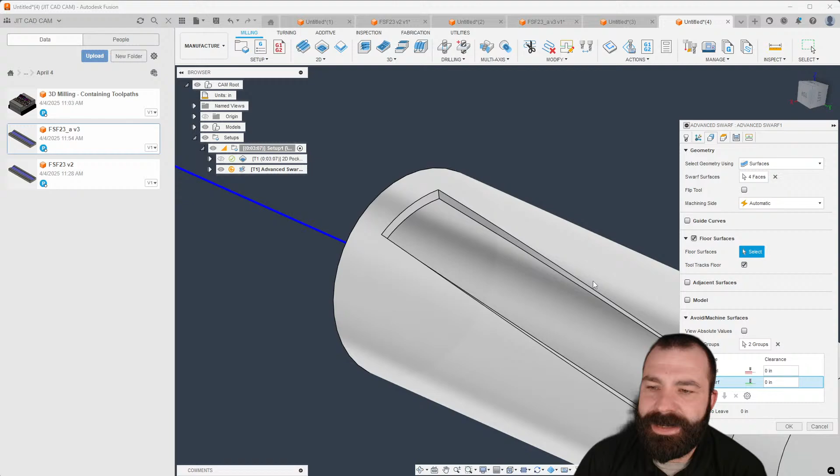So instead of perpendicular to center, they actually run parallel to center. You would go in and do this with advanced swarf. Advanced swarf has the ability to be 4th axis only, but you would need the machining extension. So something a little different in the workflow here is the ability to use advanced swarf to actually control the tool utilizing the walls and, in this case, the floor with a full 4-axis live toolpath. As you see, we start to get in these corners, it gets a little finicky where we'd need to change some settings, but that would cut those as a square pocket, not a tapered wall.

Post question: is there a way to do a different comparison between two posts? If I modify a post and I see a new post update, I want to update my post, but I don't want to lose the other changes. Well, the solution is in Visual Studio Code, Deep Thinker.

If I pull it up here, you do have the ability to compare things, right? I think a lot of people miss this. If I go to my downloads folder and pick two post processors, here's two posts. I'm using Control to pick both of them, and right-click Compare Selected. The problem is going to be based on what is where.

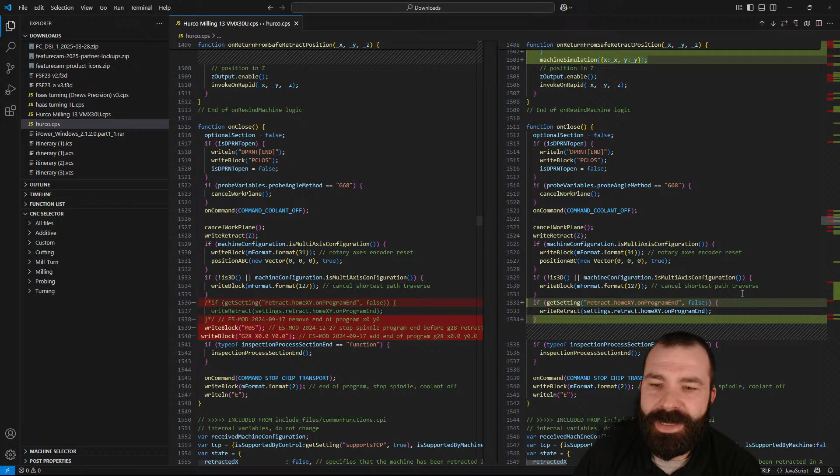This does make it a little easier for you to color code and jump quickly to all the changes over here on the right. As you can see, that is telling you this is different, that is different, anything that has been changed from one side to the other. So being able to open up where those posts are, right-click, compare, and then you'll have both of those to work on in real time.

I would also recommend, if this is something you plan to do, make sure you're using the Autodesk plugin. But when you go to actually create any code, using the export for a custom NC program based off your toolpath also allows you to edit, makes life a dream. In this case, this debugger is pulled up. This is a turning toolpath I created earlier when doing some machining, but this will auto-generate G-code based on the toolpath in Fusion.

It's not your normal debugger code. I've talked about this a lot, because if I go back now and say, okay, just create me a generic facing tool, that creates a generic toolpath. It's not what I'm actually currently working on inside the software.

If I was to post this, that is the export CNC file. You're going to see that will create an export of exactly what we just did there. And now if I go back up to custom, that is the actual physical toolpath, that 2D Pocket 1 we just created, with all the G-code associated.

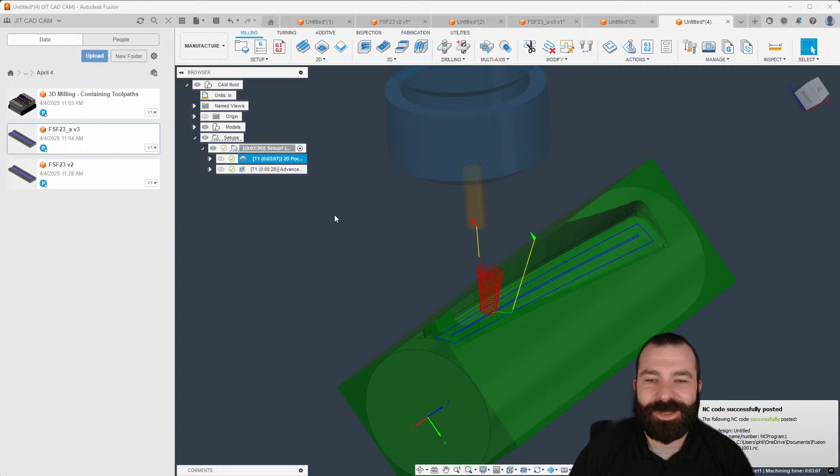Compare is huge. I think compare everywhere inside the software is valuable. Anytime I can compare things—when you guys put in tickets saying the toolpath is all messed up, I go in and simply pick two toolpaths and say compare and edit. I create it from scratch, hit OK, and then compare what is different between them.

Awesome. Any other questions outside of that, guys? To make sure I didn't miss anything, I'm going to scroll up here a little bit.

That's where we were talking about thread, I was talking about it on here, Ken. So if you see these parts, we did talk about it a little bit before, but we basically set up Fusion with a laser, plasma cutter, or water jet. Upon posting that, this is where you may need us to help you with editing the post. We went ahead and threw this onto a laser post, depending on that machine. And if you are who I think you are, you have a FANUC control on that thing, and we pretty much can run it with generic G-code.

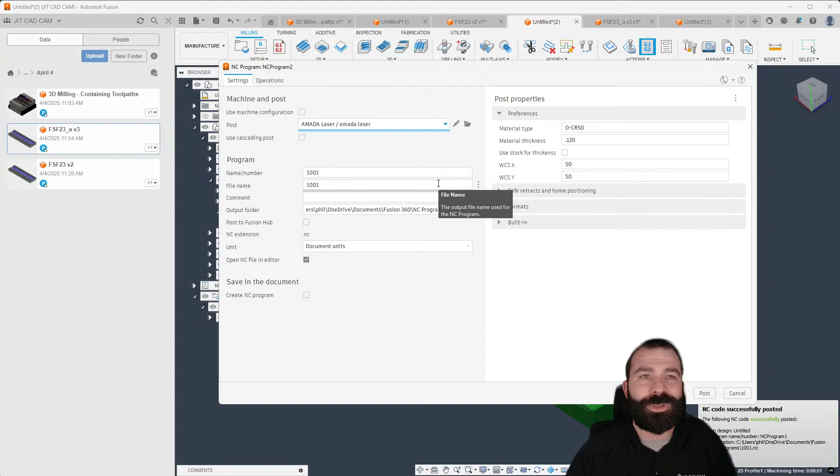Give this a couple more minutes. I'm going to go ahead and check the ticket system, make sure nobody threw tickets. That is not the ticket system. Here.

All right, someone asked if it was possible to mill a hex in the middle of a shaft. Someone pointed out that in FeatureCAM, it is possible to do that with cutoff. You want to mill a hex in the middle of a shaft on a 2-axis lathe.

So what you're referring to is like eccentric turning, right? Is that what you're asking about, Bogdan?

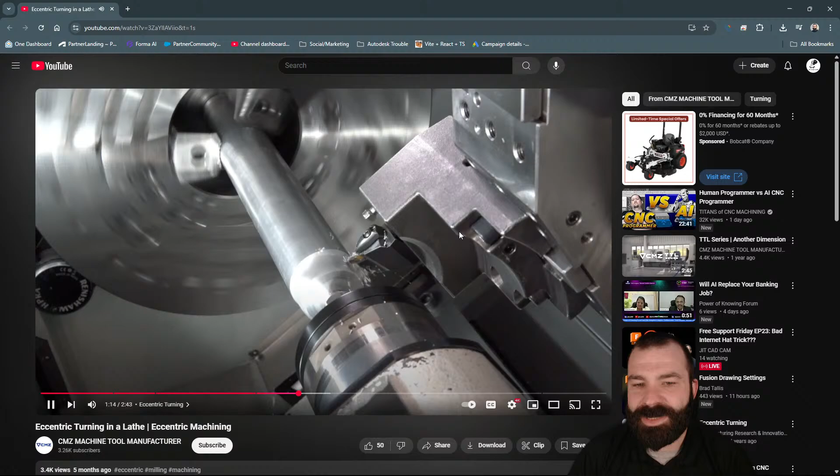So like this, right, Bogdan? As you saw them there, they were milling up, or they were turning off center, right? So again, the idea is utilizing just the x-axis, or in this case, this machine has x and y. But as they get down that shaft, you notice how there's like a lobe that's happening, right? So if you were to try to do something like that with a hex, Fusion can't do it by default. I'm pretty sure FeatureCAM can.

Awesome. Any other questions? Oh, Tim, it's been forever since I went back and visited that. No, it's not a solar light collector.

Turn a profile in a thread. No, I'll pull it up. I'll reveal, I'll give you guys the big reveal on our website if you guys haven't seen.

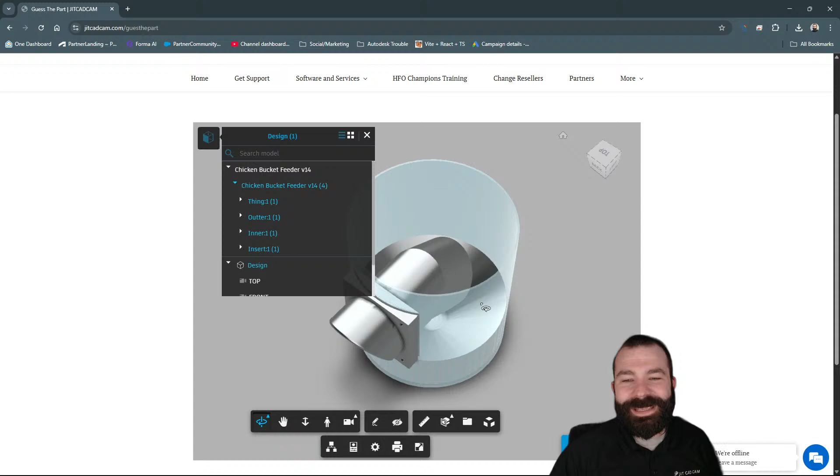Guess the part scenario, I was messing around with this over one of the weekends, and I embedded a viewer on my website, and I was curious if anybody was going to actually investigate this. So Tim, you might actually get a pretty good laugh out of this, because if you were to click this little cube right here, it's actually a chicken feeder that I designed using a 5-gallon bucket and 3D printing. So the answer is there, but this is something neat. If you guys didn't know, you could go out and actually view stuff via the online viewer, and then you can move it around and look at it in different ways, seeing the whole assembly. That's a 5-gallon bucket and just a hole saw on the side to give them an area to reach their head in and eat. And then I coned it at the bottom so the food always falls underneath. I used to have goats - goats are, to say the least, a bunch of assholes, and they used to get into the chicken feed, and this is how I remedied the situation.

Ah, so Ken, if you're trying to do something based on that on a lathe, are you doing it on a lathe or on a mill, Ken? I'll give you a sec here to respond.

Tons of you in chat today. On a lathe? Yeah. So if you were trying to turn a profile on the lathe, let me get back to the one of 8 million parts that I have here. The problem is going to be, again, you're starting to get into that world of what Fusion can't really do out of the box the best.

But if we were doing turning, and I'm going to have to create a new setup here real quick, and I was to do a threading toolpath, right? The problem will be when I go in to define my tool, I can't really define the threading tool as a grooving tool. At least I can't remember if I can. We could try it here real quick. Actually, you can. Look at that. Can't always be right about everything.

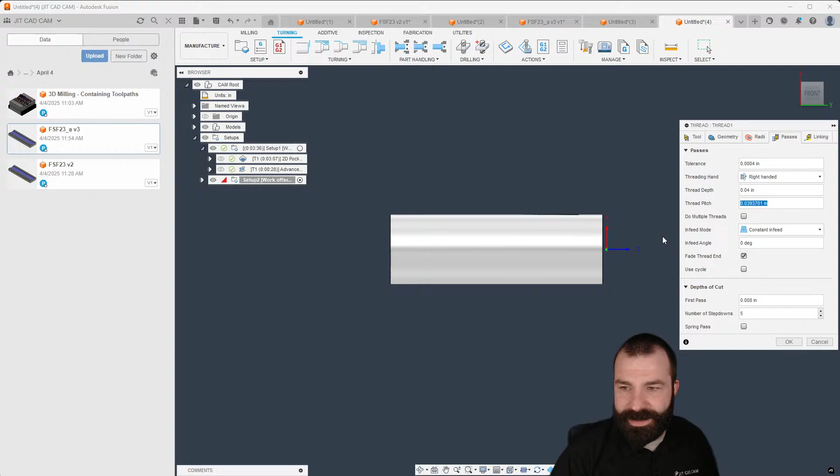But if you set your pitch, whatever that pitch is, right? Let's just say, for example, it's 0.05, 20 per. But there's the actual part that I want. And then my toolpath, again, I'm using like a disc cutter or a ceramic cutter. Whatever we define that to, that would chase that profile. Again, as long as you know whatever that actual feed rate is or that pitch to be able to program it. So it looks like you could.

Any other questions outside of that? But I'm going to up the ante here and we can run sim on this. I'm going to say that was 0.02. That was a typo on yours truly. Let's say 0.5 pitch. And if I simulate this, we're going to see it slam into the part, but that would be like a helix, the length of the part, right?

So keep in mind, one, I actually need to adjust quite a bit more. As you can guess, look at our radii, stock OD. It's looking at the model face for everything. That's why that first pass looked a little funky. So if I was to change my stock real quick down, same size, and then simulate.

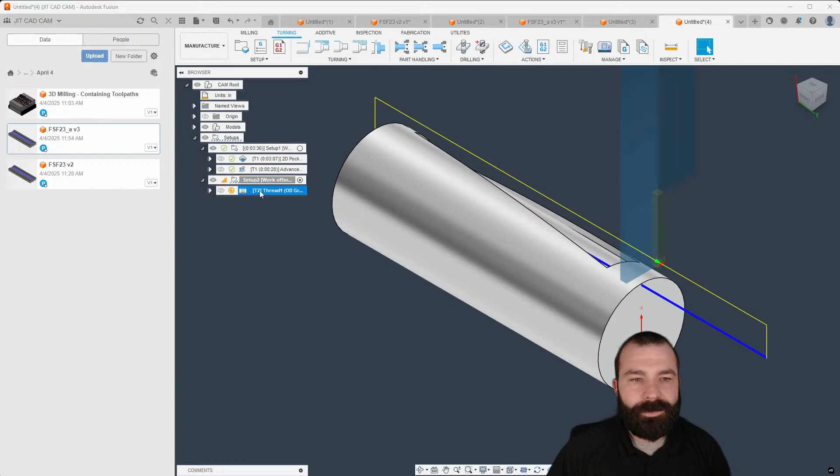And what I'm going to do is I'm going to turn my part off. I might actually have to turn, oh, no, there we go. It's going. I might have to turn my accuracy up, there we go. Ken, I hope that helps you out there. As you can see, it's completely possible with an OD grooving tool.

Well, any other questions, guys? Open up to you. Problems, issues, complaints, things that you noticed throughout the week. I guess I have a few more for you guys before I jump. Actually, I'm going to do some new Workflow Wednesday videos. I have quite a few lined up, one of which is using... okay, no problem, Ken. When you send in an email, we can get on a meeting.

I think I'm gonna finally rip the Band-Aid off, and we're gonna talk about setting up possibly jigs and fixtures and everything with stock. Oh, you know what? I need to do the container method, and we're gonna do the import step. Maybe we do a double Workflow Wednesday next week. What do you guys think? We double down? Do the container method on top of doing the import step model for your tool.